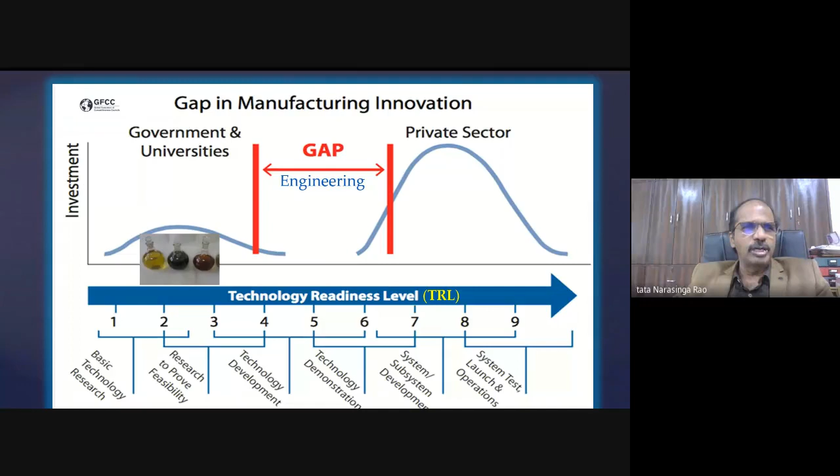Now you are able to see the bottles. It's nano silver, right? Yes, this is one example I'm giving — many people know who attended my previous talks. This is nano silver suspension for antibacterial application on textiles. We make it at laboratory with some students. We demonstrate nice colors because of the particle size — within less than 100 nanometers, whether it's 10, 20, or 30, the color changes because of surface plasmon resonance absorption.

This has tremendous antibacterial potential. So when you apply it on fabric, the company asks, can you make this in large quantities? Then the engineering part comes. You can see the next one, where we had to design a reactor in collaboration with a company, and we made the reactor, demonstrating that these suspensions shown in small bottles can be upscaled up to 15 liters per batch.

The company that received this technology — the CEO is standing in front of the reactor watching how it is made. Then in their company in Bangalore, they set up similar reactors, a plant is made, and now they can make hundreds of liters per day. Eventually they supply this to garment manufacturers like Color Plus, Wrangler, Jeans and others, who apply this. So from laboratory bottle level to product level, you can buy these shirts. It all goes through this chain because this gap is crossed by us.

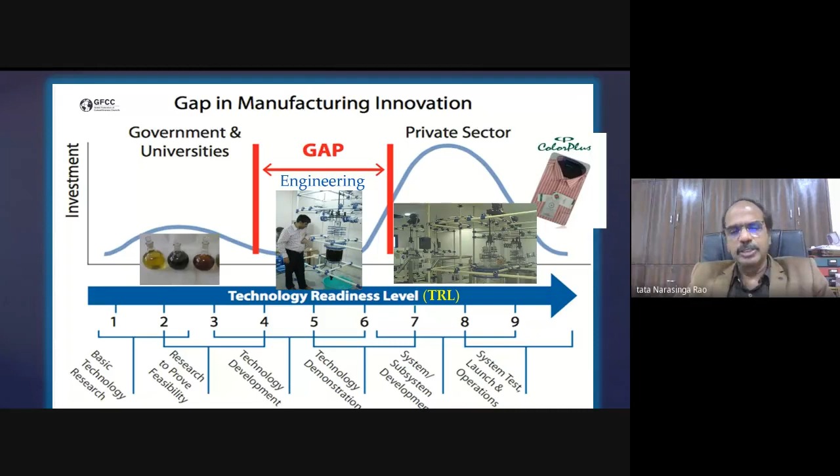So nanoparticles have relevance in textile and a lot of applications — metallurgical, mechanical. Many properties change: color changes, magnetic properties change, boiling point, melting point change, optical properties, electronic properties, and metallurgical engineering properties like tensile strength increase when the grain size comes down — there is the Hall-Petch relation. So a lot of things change, and every sector or branch, students can put their hands in this and do nanotechnology.

But earlier it was a hype; now there are technologies which are saturated, which are now frozen — these are the technologies that nanoparticles can achieve. So now the scale, what you can see here again...

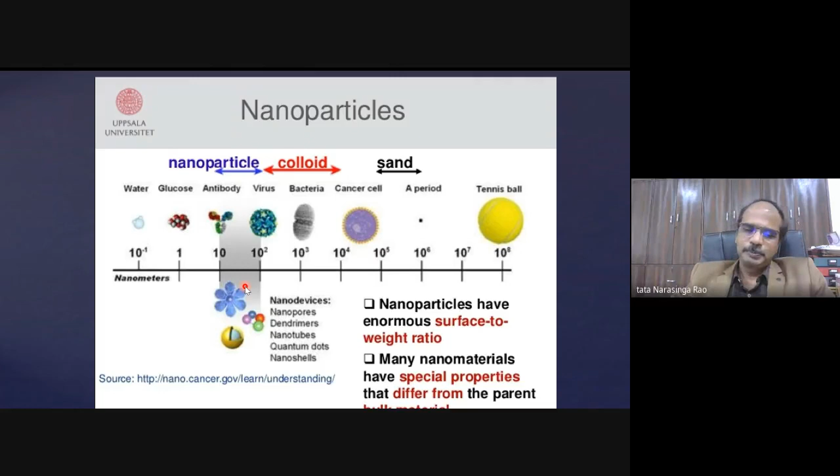And when the virus comes in touch with your body cells, like starting with the throat or nose, it just goes and sticks to the human cell, which also contains proteins and nucleic acid. And if they both match each other, which usually happens, they start entering into our human cells and start replicating their own cells. So most of our cells will get converted. So that is where the danger comes.

But if you have strong immunity and enough antibodies, they don't let this happen, so they get slowed down and finally your immunity dominates and that will go. So nanotechnology has a huge potential to transform people's lives, whether it's bad or better, but we should always feel better because although the pandemic has disturbed a lot of lives across the globe, there are still a lot of good things if you're a positive thinker.

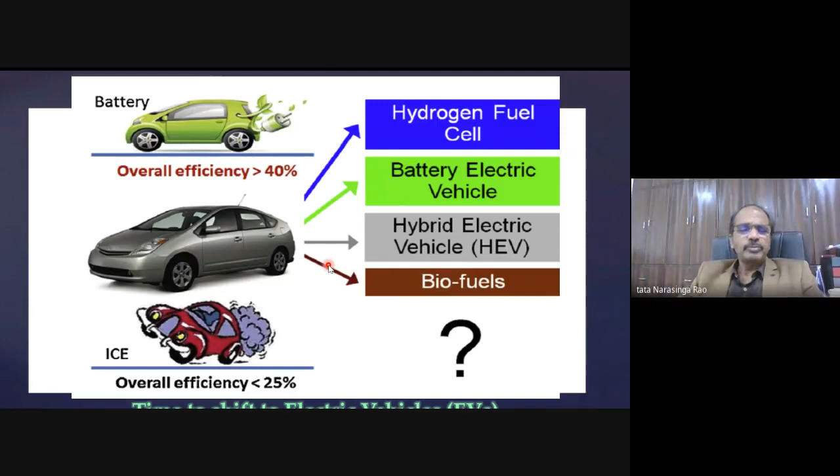Okay, so sorry again. Then if you see in India, auto industry, there are already so many kinds of cars available. You see the Hyundai Kona Electric. This is there in India, we see it on the roads. Tata Tiago, and Mahindra Electric KUV is now launching, and Maruti Suzuki Wagon-R with EV. So all these are already available in the market, but people hesitate because of two things. One is charging stations are not well established.

There is another thing companies are trying to address here, and that is the battery cost. Because we import the batteries, the cost of the car is slightly higher than the equivalent diesel. That's why people still hesitate, because you have to pay money directly rather than waiting for the money to come back after 3-4 years in the form of cost reduction in fuel or electricity.

And you can see a lot of two-wheelers, three-wheelers, a lot of auto rickshaws. Electric rickshaws are plentiful. You can see more if you go north. If I go to Benares, I see many of the autos are electric vehicles, but mostly on lead acid battery. And even the buses, Ashok Leyland is now launching buses with lithium-ion batteries. And of course, BYD, one company in China, supplies a lot of buses.

And if you see in Hyderabad itself, from Mahatma Gandhi bus stop to the airport, the buses are all electric buses from BYD, again a Chinese company. So China has a lot of influence because they work hard and they mass produce things. And when you mass produce, the cost will go down because the supply is more and you're controlling demand. So all this happens.

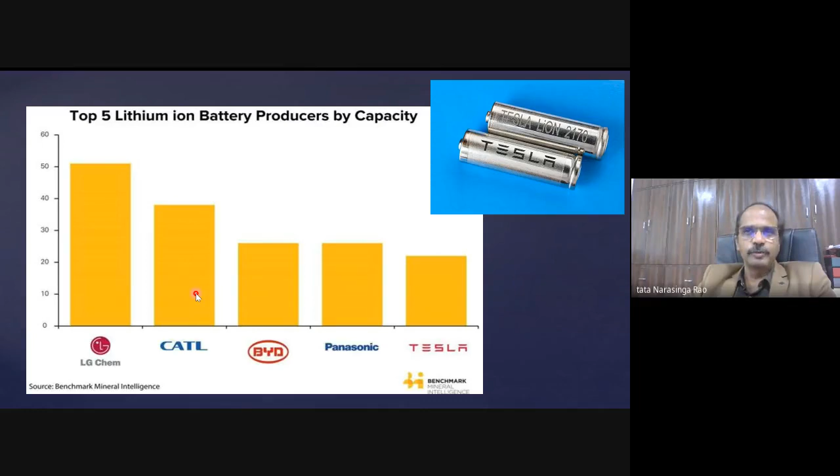Still we spend a lot of money on imports, and if you can indigenize the technology of battery, which ARCI is trying to do, and of course we are partly successful, then I'll show some of our slides. So a battery usually contains graphite as anode, and as cathode, lithium cobalt oxide if it's your cell phone, or if it's an electric car, there are other batteries like lithium iron phosphate and lithium nickel manganese oxide. Those who work in this area are very familiar with all this nomenclature.

So lithium is expensive because lithium is not there everywhere. Even in India, lithium is not there. But China has got plenty, and a lot of South America, Bolivia, Argentina, and Chile, have got a lot of lithium sources. And these advanced countries like China, Japan, and Korea go and lease the land or buy the lands of these mines in these South American countries, because South American countries are not so advanced. They are underdeveloped or developing.

So these people go and mine the raw material, metallurgically process it, and make it in the form of raw sources, lithium carbonate or lithium hydroxide. And these materials are used as precursor materials to make these batteries. If I want to make lithium cobalt oxide, I need to start with lithium carbonate and cobalt carbonate, for example. When you mix them together and burn it, it becomes LiCoO2, and the carbonate will become carbon dioxide, and the carbon dioxide will go out.

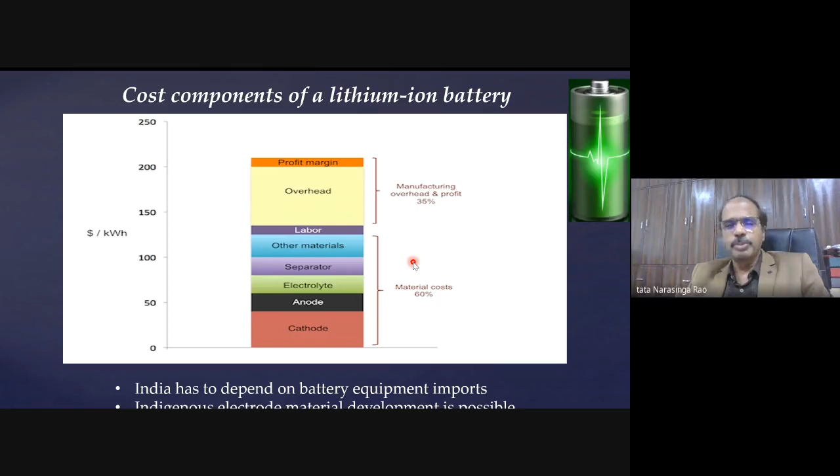And 60% of the cost of batteries is materials. So if you can focus on material development, your battery cost will finally come down, because other things are not so expensive. So at least you can reduce the cost by 30 to 40%. That itself makes a big difference.

So in India, battery plants are not there at the moment, and that's what the government is looking at, because there are companies like Mahindra and Tata that make electric cars, but they import the batteries. Unless you have battery plants in India, you cannot. For example, Hyderabad Batteries Limited usually makes nickel cadmium, lead acid, and high power batteries also.

But now we are in touch with them. We have some small agreements also, non-disclosure. And Hyderabad Batteries Limited itself is coming up with a 40 megawatt hour plant on the Bangalore highway for lithium-ion batteries. They're focusing on probably trucks or buses or whatever it is.

But then we have a huge mega plant coming in Gujarat, with Suzuki contributing 50%, Toshiba 40%, and Toyota Denso 10%. Together they're making batteries. The plant is already getting ready for operation; because of the pandemic it's slightly slowed down. But once they start making them within the country, people get employment, the cost of the batteries comes down, and the cost of the cars will come down.

And we need more battery plants in this country to feed the electric vehicles. If you imagine all the vehicles you see on the roads in Hyderabad or mega cities being replaced with electric vehicles, the numbers are so huge. So you need to have more plants. And indigenous technology for making materials and batteries within the country is very much the need of the hour to go on par with other countries, because we are not so behind in these technologies.

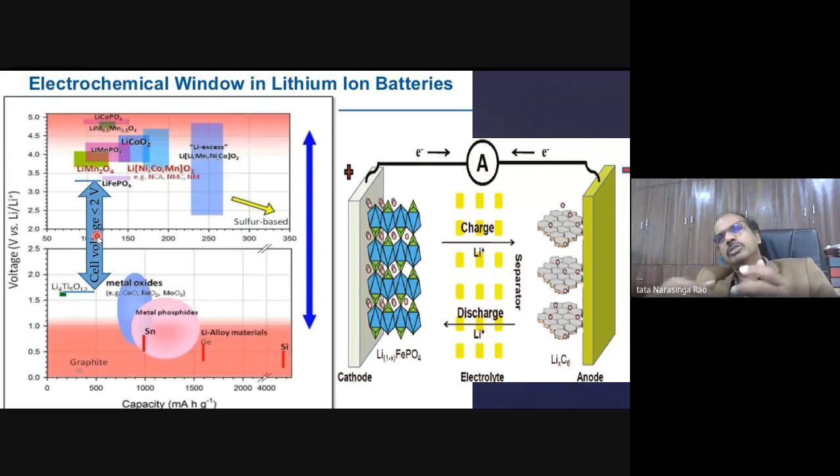Now, a lot of public transport vehicles would like to use lithium titanate as well because they want fast charging in the bus station. So all your cars, taxis or buses which are within the city want to get charged very fast. They don't want long range, so they don't mind using the LTO and LFP combination with 2 volts. But they are very happy that the car gets charged, there is no problem, and it goes to a large number of charge-discharge cycles.

So we want to make in India, where the public transport system is so used, so that's why even Toshiba and Suzuki are all looking for LTO batteries. But to make those batteries, the starting materials, lithium iron phosphate and lithium titanate, are the two key materials India needs. Of course, lithium nickel cobalt manganese oxide has slightly higher voltage. Some high-end cars like Tesla use lithium nickel manganese cobalt oxide because it's a higher voltage.

But the problem here is cost, because cobalt is involved, and there is an issue of stability. But you can manage it by putting more money. So a Tesla car is so expensive. But in India, there are only a few high-end cars you will see on the roads; the majority of the cars are not.

So you can choose the chemistry, but in India, the LiFePO4 graphite combination for long-range vehicles, or LiFePO4 LTO for public transport or short-range vehicles. So graphite is not an issue, but lithium iron phosphate and lithium titanate, these two materials, one has to make. I hope now it's clear the talk will be on these materials. Of course, NMC, like Tesla's, we're also doing, or the Chennai group is doing.

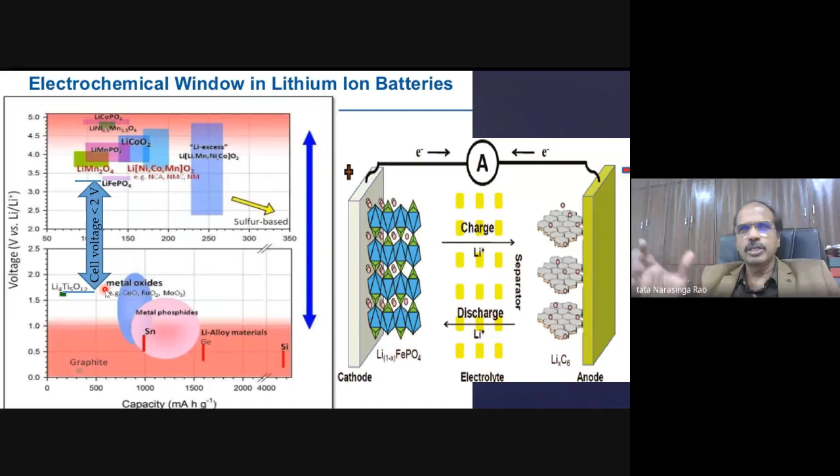By the way, we make these materials in Hyderabad at ARCI, but ARCI also has a research center at Chennai, where we have a pilot plant to make batteries in the form of cylindrical cells, and then demonstrate making small modules and electric scooters. So we focus on the materials, and they focus on making them into cells. Together we come up with this technology.

So this is one, and now you can see here LFP LTO. LTO means lithium titanate, as I showed already, and LFP means lithium iron phosphate. You can have this combination of battery to get very good performance. What I'm showing here is a capacity of 170 milliampere-hours per gram, both electrodes, 150 to 170. And they're very flat. That means until you take 90% of your energy out for your scooter, your voltage remains constant. So your electric vehicle keeps moving.

But in some batteries, the voltage falls with a slight slope, so after running for some time, if you're targeting 300 kilometers or 250 kilometers, you have to be very careful. It's like the reserve in the case of fuel, but here you have to start charging. So these are the things we focus on.

So we work on these two materials, and lithium iron phosphate is excellent and low cost because there is no cobalt. It's only iron, and lithium you have to put money on anyway. This was invented by John Goodenough, who got the Nobel Prize with two of his contemporaries, one Japanese who worked on technology, and another on fundamentals.

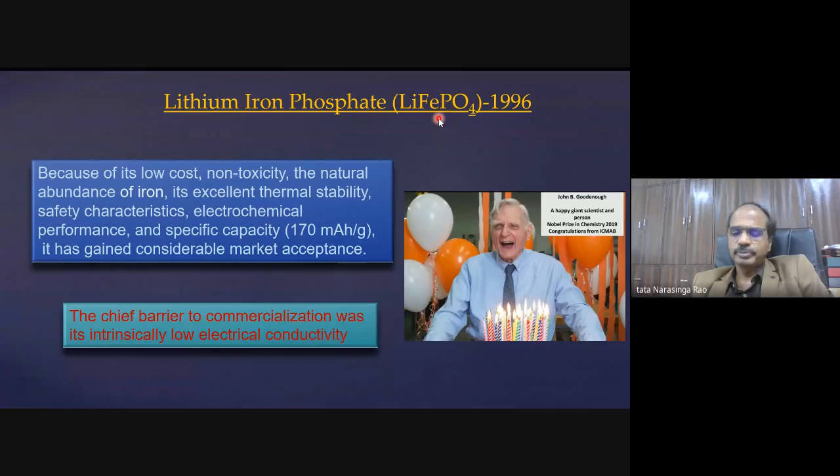So then what happened when nanotechnology came? In nanotechnology, when you have a big particle of lithium iron phosphate, because it's an insulator, the diffusion length of the lithium when it enters the particle requires it to swim through this diffusion length. But if you have a nanoparticle, for the same volume, the diffusion length is small, so in each particle, the lithium goes in and comes out very fast.

So charging and discharging is very fast, and all your material gets lithiated in a short time, whereas with bigger particles it takes a long time. So if your battery has to be charged in a given time, with 1 to 2 micron lithium iron phosphate particles you only get 50 milliampere hours. With nanoparticles, you get 150, 3 times more, because it quickly gets lithiated, or when you discharge, it gets delithiated. So the size effect is more important.

But you can ask, how is the current taken out? When the electron comes to the surface very quickly as the lithium moves, these particles are coated with carbon, which is electrically conducting, connected to the current collector. So you coat these materials as a thin film with carbon incorporated. Whenever there is lithiation and delithiation, the electrons go to the current collector, and that current comes through your cell and through the external circuit, and your electric motor runs.

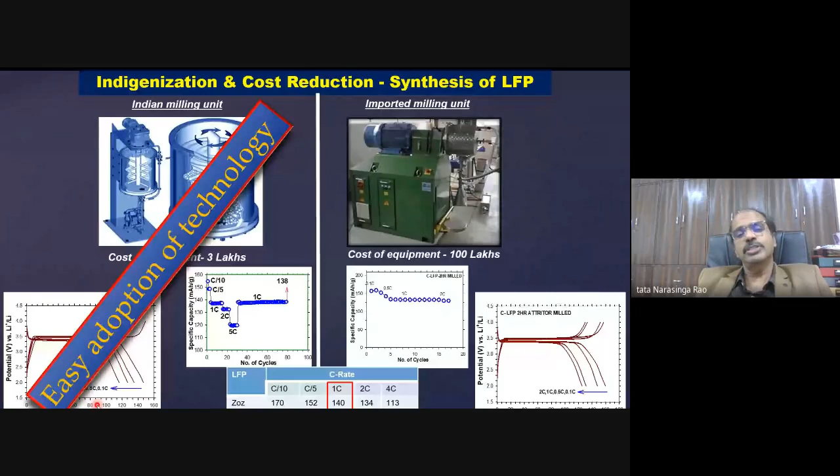That's what we do. And the other material, lithium titanate, which is an anode for fast charging - that's the same thing, because again it's not such a good conductor, so we have to make it in nano size. So what I am showing is nano size makes a difference.

And the Nobel Prize that Goodenough got for LiFePO4 is really seen in electric vehicles, because they are converted into nano size and carbon coated. So size has a big role to do with it, and nanomaterials have a big contribution in energy storage in electric vehicle technology.

All research usually starts at the laboratory level, and lithium titanate has taken the leap only very recently. One of my young research students, a girl who is now in the US, joined for her PhD, and I gave her a topic to start making lithium titanate. I didn't know lithium titanate would become so famous now, but we were only interested in the fundamental research - how the size affects the kinetics, the charging rates, and the capacity improvement.

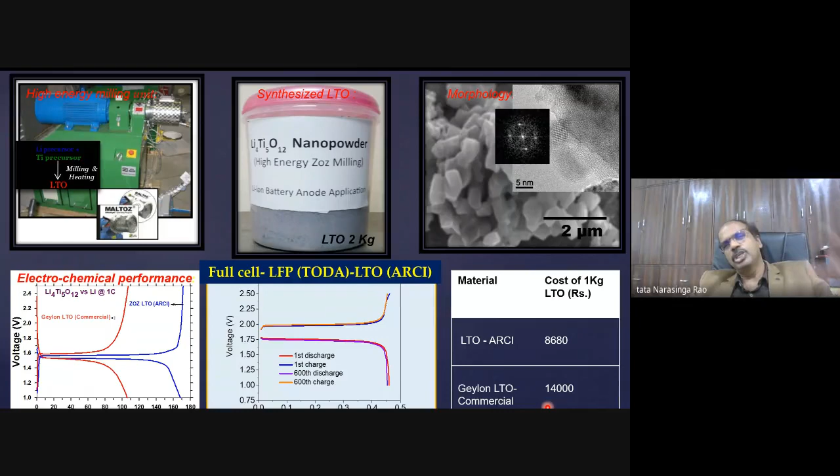So there are companies interested and collaborating, testing milling and such on their side to make tens of kgs for validation at the commercial level. And on another side, these materials are given to companies to test, so that a total ecosystem is created right from material making, technology, and commercial upscaling, to supplying the battery industries - making the institute rich, the company rich, and the nation altogether.

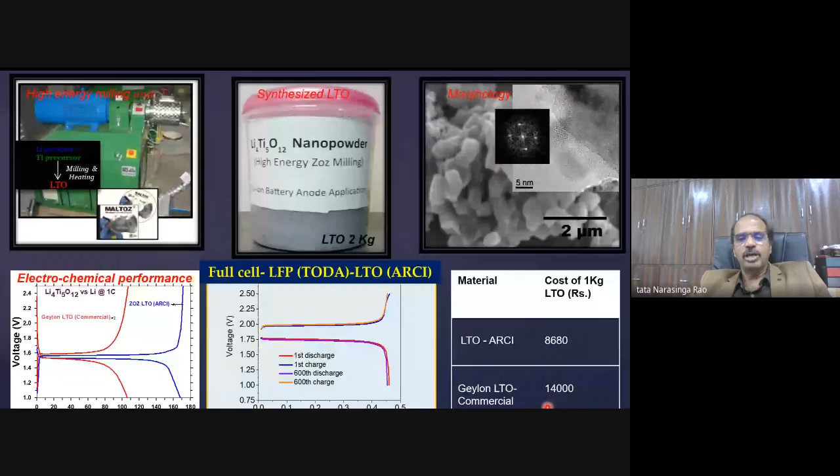We demonstrate - our Chennai people demonstrate the Chennai plant. They make these materials, use them to make plants, batteries, and run some motors, as you can see here. And people look at next generation batteries - the next generation battery is lithium sulfur. Lithium sulfur battery, what we do is - I think I have half an hour time, right?

I think I can finish it, no problem.

Whereas sulfur, lithium sulfide, lithiated sulfur, is 1600. My God, so it is so many times higher, but its voltage is less, only 2 volts versus lithium. If you take lithium cobalt, it's 4 volts. So I'm compromising on voltage by 2, but increasing the capacity multiple times. The total energy density is capacity into voltage, and if you multiply, sulfur gives very high energy density that can be stored.

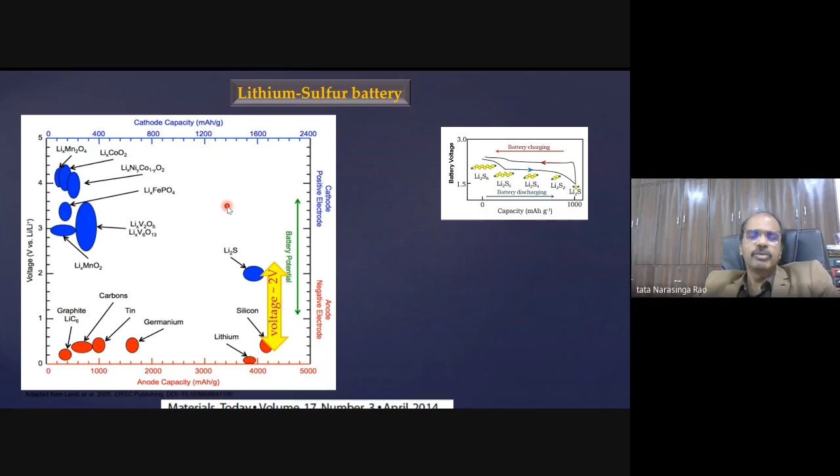But your energy density means the driving range. If you want to go to Pune or Tirupati, then you use lithium sulfur batteries, which are smaller in size because of high energy density than conventional lithium batteries. So the whole world is looking for lithium sulfur batteries, and ARCI has also initiated work at TRL3 level, and we have shown that.

But there is a challenge in lithium sulfur batteries. Why? Lithium sulfur batteries are known for decades, but not implemented because of a lithiation problem. During discharge, the sulfur takes lithium and forms polysulfides, Li2S8, Li2S6, all these are soluble. So from the sulfur these dissolve in the electrolyte and go to the other electrode during discharge, and you lose a lot of sulfur during the shuttling, and then the battery slowly dies.

So your dream of getting high energy density will last only a few cycles, maybe 20, 30, 100 cycles, whereas actual batteries require 1,000 to 1,500, even 2,000 cycles if you want to really use them for electric cars. So can I increase its cycle life by containing these polysulfides without letting them go into the electrolyte?

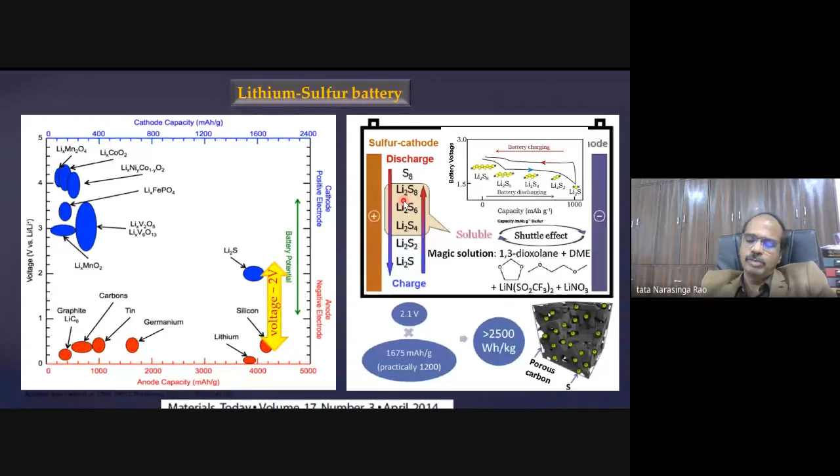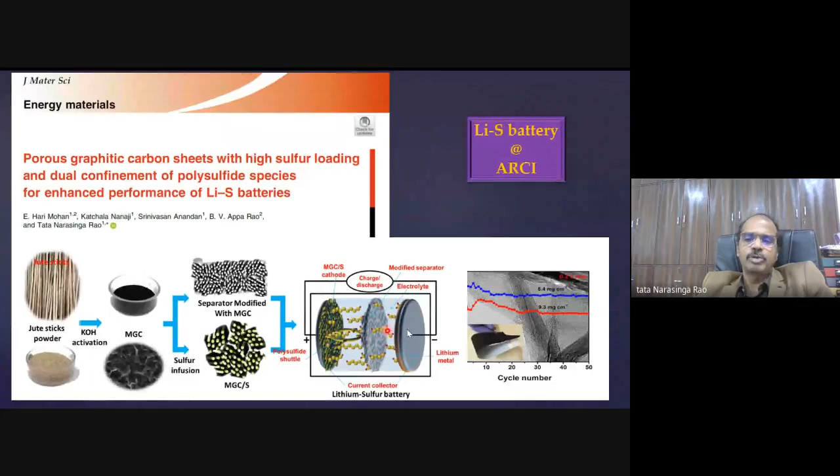You can see my team at ARCI, my student Hari Mohan, now in Germany, and we recently published this paper in Energy Materials. We make carbon from jute stick, nanoporous graphene-like carbon, and incorporate sulfur into it, then use this as electrode. We also have a separator coated with this kind of carbon, so that any polysulfide gets trapped in the electrode, and a little coming out gets trapped on the carbon on the separator, so it doesn't escape outside. That is what we have demonstrated here.

You can see at 50 cycles, 800, whereas usually 200 or 170 is for conventional battery material, and I'm talking about 800 with very good stability. We tested up to 50 cycles, but the trend seems to go beyond that. The energy density practically can go up to 2 times, 3 times, because you put a lot of carbon as support, but that itself is a good achievement.

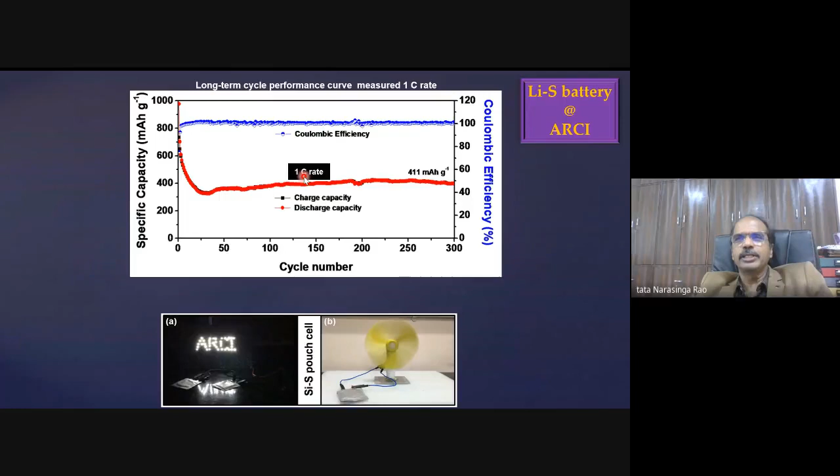Recently we also showed up to 300 cycles at high C rates, meaning higher charge discharge capacity. That is a real demonstration for practical application in electric cars, because when you drive very fast, it is around 1 C rate, and I get 400, which is double that of conventional lithium battery. That means instead of 200, I can travel 400 kilometers, which is a very big driving range.

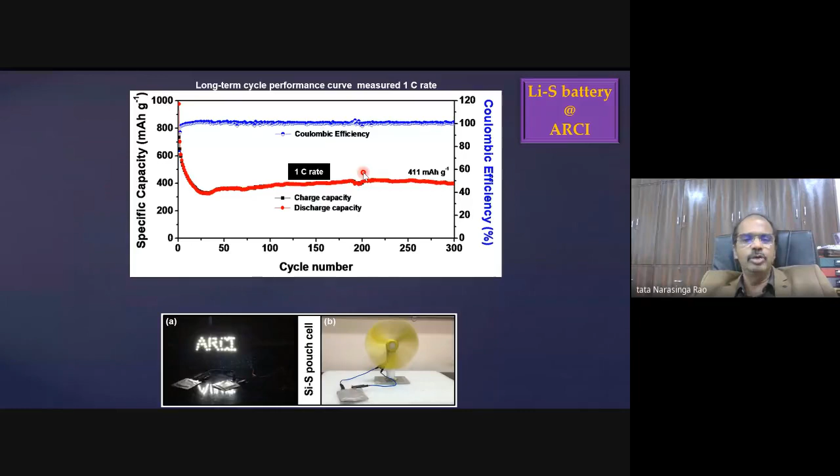So these are the things we are working on now at lower TRL levels to improve the lithium-sulfur battery, and then maybe next we'll go to the bigger scale.

So I have another 25 minutes, maybe in 15 minutes I'll finish my talk.

A capacitor, if you recall your high school physics, is 2 metal plates with a dielectric in between. When you apply voltage, the charge gets accumulated on the electrodes, and that gives the capacitance.

So the rule is half CV squared: how much voltage you can sustain on a capacitor, maybe 2 or 3 volts or 4 volts, and what is the capacitance in terms of farads. C is the capacitance and V is the voltage, squared, and that is the energy density.

So in supercapacitors, why is it called super? Normal capacitors, what we use in our printed circuit electronic boards, are all in microfarads or maximum millifarads. But in a supercapacitor, I'm talking about hundreds of farads, thousands of farads. So once the farad, the capacitance C, increases, the energy density increases. You cannot use small capacitors in an electric vehicle, although they are storage devices, because the energy density is so small.

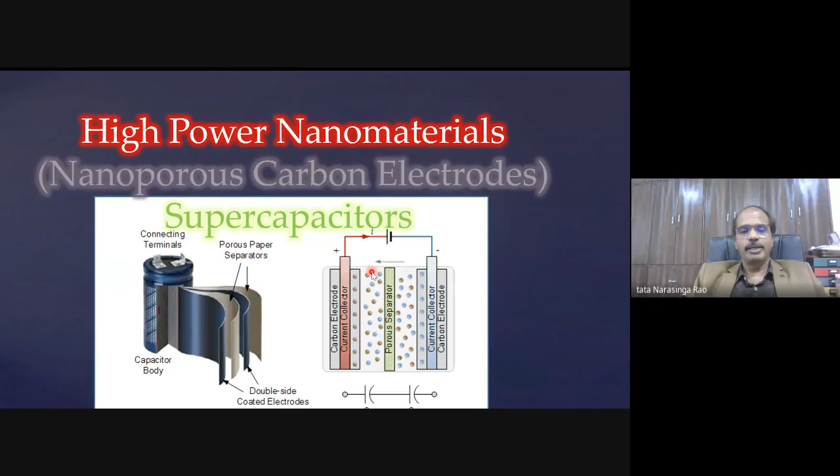But I can use a supercapacitor for a race car. Okay, it will go 200, 300 kilometers per hour. So again, my student shows a supercapacitor is like a 100-meter race, where the guy has to put all his energy and run for these 100 meters from the beginning. Whereas a lithium-ion battery is like a long race where people run slowly, but with lots of stamina, for 10 kilometers or so.

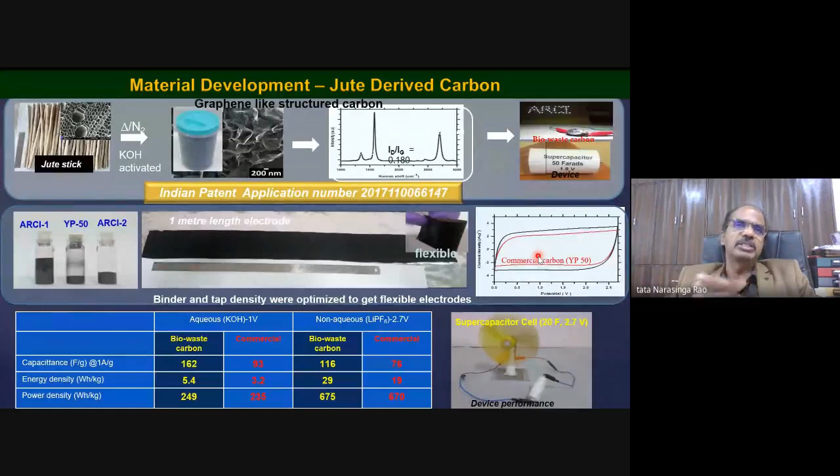So we demonstrate this and showcase that at several levels, whether energy or power, we're on par with the imported ones. And we show our demonstration at small coin cell level, ARCI's lighting with the supercapacitor using this jute-based carbon. We also have other materials like coconut carbon. We're working with a company to make use of this coconut-based carbon, converting it to a huge surface area by CO2 activation.

It's called activation. And most important, we have HPCL, a public sector oil company, HP. Your HP petrol bunks are there. They have oil refineries, and they have a lot of byproduct called petroleum coke, pet coke. Pet coke contains a lot of sulfur, and a lot of small-scale industries like cement and steel use pet coke as a fuel, but a lot of sulfur dioxide comes out as a toxin. In fact, import is banned, but within the country we have 14 million tons of petroleum coke generated every year, and many industries burn it, contributing to a lot of pollution.

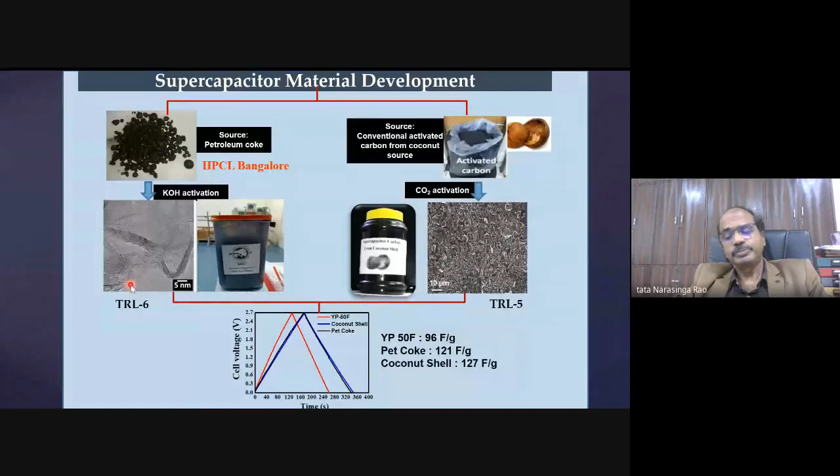But petroleum coke is 90% carbon. With coconut, you only get 10 to 20% of actual activated high-surface carbon, whereas here you can extract up to 70%. So now we are working with HPCL, funded with 1 crore, to make this material into supercapacitor grade, and we established a fabrication line together with HPCL at ARCI, with all this equipment to make supercapacitor cells. You can see jelly rolls made, carbon coated on aluminum foils.

You can see the negative and positive electrodes with the separator running, the white one, then rolled into huge jelly rolls, and finally you flatten both sides, put it in a can, and make a cell. Now I have a Maxwell device made with YP50, the blue one, and ARCI's is the green one. We are on par in size and capabilities. ARCI and commercial are very close, both in charge-discharge and energy density. And that is because of the laser welding technology.

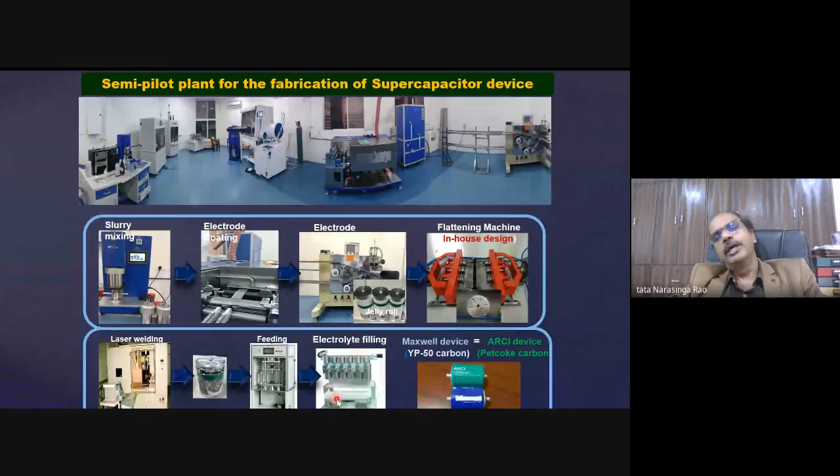Here, the laser welding of this and flattening, this is a very critical engineering aspect. I was showing, jumping to the product side, the engineering gap in my first slide, the TRL slide. So that gap is crossed here in ARCI because of these facilities. Although we made material and scaled it up and then made a jelly roll, even from here to here it is a big challenge.

So we crossed all over, and today probably it is the first device of 1200 farad on par with the 1200 farad imported one, and we are the same as the benchmark one. We're going to upscale, more supercaps will come, and we're going to demonstrate a bicycle with this soon with our own supercapacitor. Earlier we already demonstrated with the imported ones. Now we're going to do our own supercaps, and probably they're also good for this bicycle.

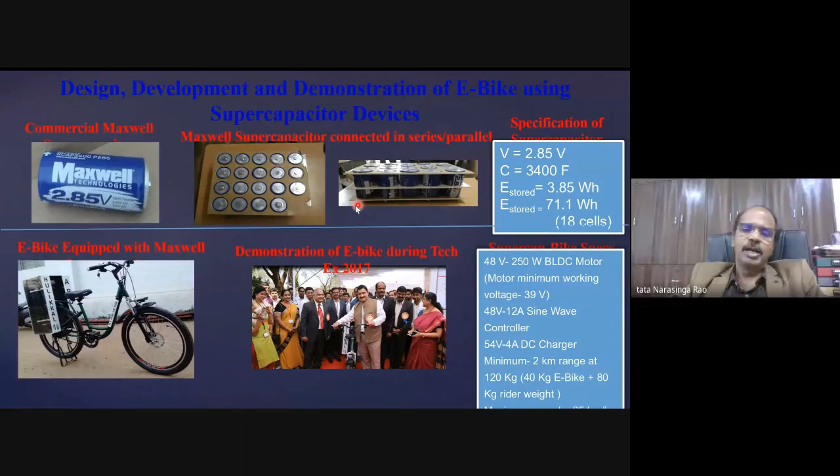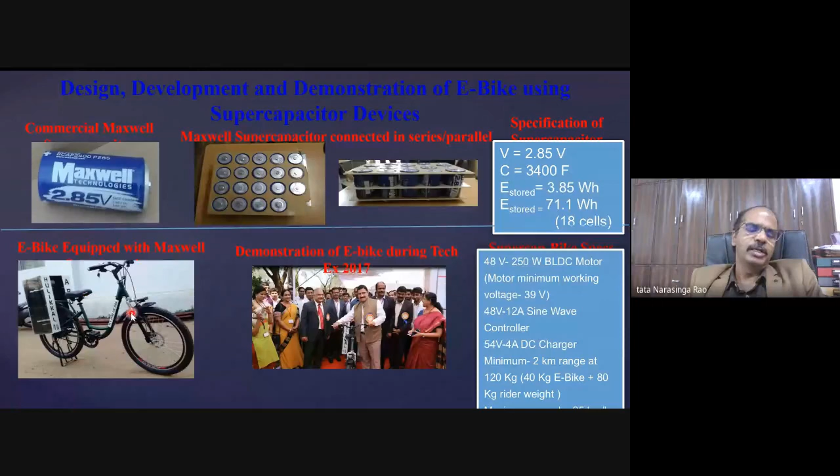Earlier we demonstrated in 2017, packed with Maxwell supercaps, and now that I showed our supercap, we can use this supercap and do the same thing. So it's a parallel work. One, you demonstrate and show the capability that you may have a bicycle without batteries and only supercap. And on the other side, you make the supercap from your own material, like pet coke based. Then you put these supercaps in and demonstrate. That's what in the next few months we're going to do, and go for the higher scale and finally demonstrate for a bigger electric vehicle.

We are also looking at a lead acid battery driven auto rickshaw, which is very common, but the lead acid battery gets abused very fast whenever you have speed breakers or a bridge. Many of the autos cannot climb flyovers. They go only on the service roads, because climbing is difficult, especially with lead acid electric vehicles. But if you have a supercap combined in a hybrid mode, whenever you need very high power, very quick energy to climb for a few minutes,

or a speed breaker came and it stopped, when you want to start again you need to accelerate. But for acceleration you're drawing very high currents, and the battery cannot give high currents. It gets abused, your 3 years battery life will come to 6 months, and your lead acid battery will die. So supercaps can assist in supporting those normal batteries, whether lithium-ion or lead acid, so that they don't get unnecessarily abused whenever there is a high demand of energy, whether it's speed breakers or climbing ramps.

So this is our excellent team of people; these are all actually our scientists and students. This guy is not a driver, he's my senior scientist. This guy recently finished a PhD from IIT. So all these are our members. An excellent team we have. And sometimes for the hard work, we get a small token of appreciation.

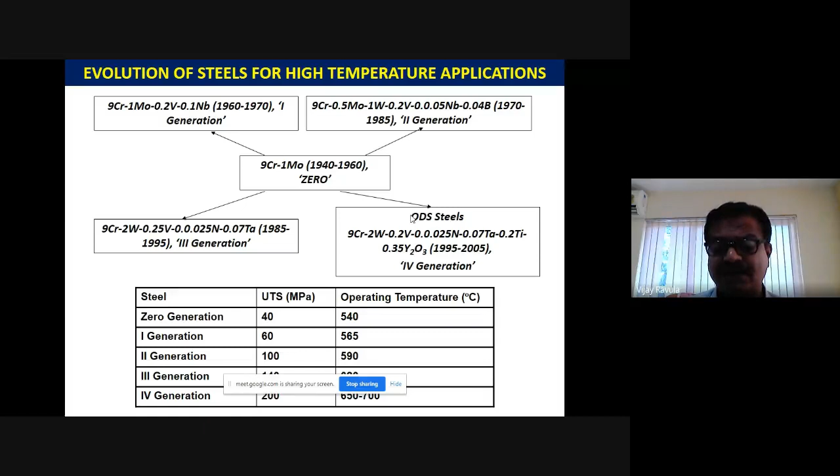If you compare the strength and the operating temperatures from the 0 generation to the 4th generation, the strength levels have gone up almost 5 or 6 times, and the operating temperatures have gone up by around 100-150 degrees centigrade. So that's the overall development going on around the world.

And if you look at the clad tubes of the fast breeder reactor, we have nuclear reactors where uranium oxide is the fuel, but unfortunately uranium oxide is not available in India, and we have to import it. Because of this limitation of the supply of fuel, the nuclear power plants are not running to full capacity, only at 50% or 60%. But in India, we have a lot of thorium available, but that's not used for the conventional nuclear reactors.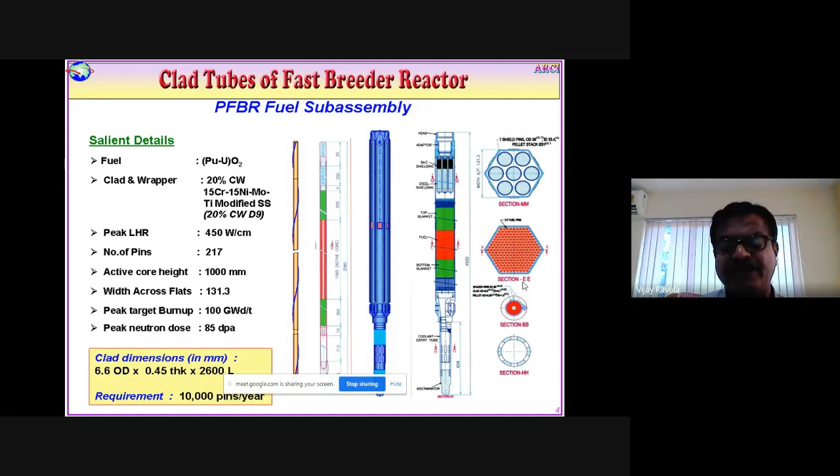But unfortunately, the target burn-up is 100 gigawatt days per ton of the material, and the neutron dose of 85 dpa it has to withstand. The problem is when conventional steels are used, you have void swelling, radiation creep, helium embrittlement, and an increase in ductile to brittle transition temperature.

So that's why the material swells, and then a lot of compressive forces are generated, and the material fails before the fuel life is realized.

So what is the material selection? You should have high swelling resistance and adequate end-of-life creep strength and ductility, because it should not break, because of handling of this radioactive material. At the same time the material should have less active elements, so that this material does not become radioactive, and disposal of this material is also a big problem.

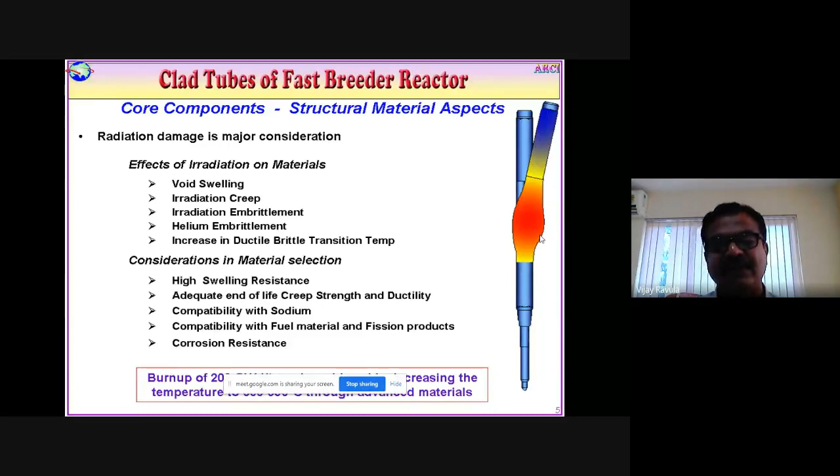And then compatibility, because this is all sodium cooled. Liquid sodium is used to extract the heat generated by the nuclear reaction, and of course corrosion resistance and other things have to be there.

So that's all in the fast breeder reactors. Coming to the fusion reactors, India is a partner in the international development of fusion reactors, where we have blanket plates and diverter plates, which also get radiation exposure and high temperatures, so the materials have to be developed to withstand these things.

So that's why high temperature strength, high swelling resistance, and lower accumulation damage. The material should not become radioactive, but anyhow it will become radioactive, so the activation life should be as minimum as possible. That's why reduced activation ferritic martensitic steels are recommended for this.

Coming to the thermal power plants, presently our plants operate at around 550 degrees centigrade, and the efficiency is only around 41%. But if you operate around 700 to 750 degrees centigrade, you can go to around 46% efficiency, and thereby realize more energy from burning coal.

But the problem is, if you want to operate at higher temperatures, the pressure also goes up. At 540 degrees centigrade it is subcritical; in supercritical, the pressure is 28 MPa, 280 bar, and if you go to 760 degrees centigrade, around 350 bar is the steam pressure developed, which goes into the turbine.

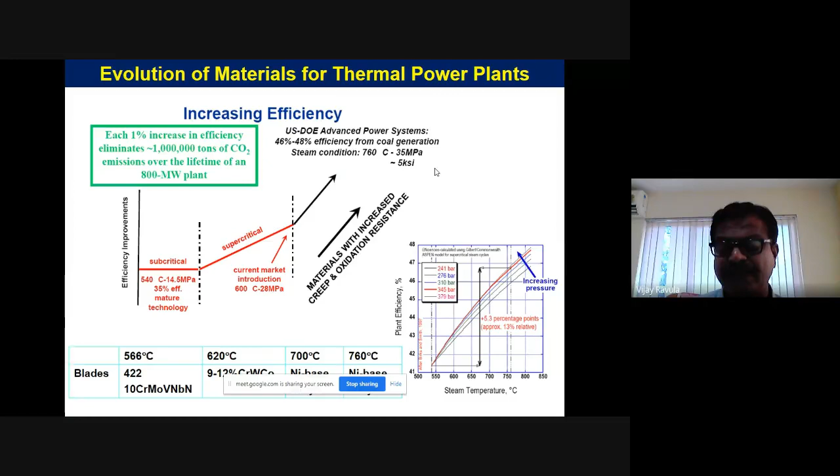So the whole material needs to withstand that kind of stress, and the life should be around 1 lakh hours, both in terms of creep and fatigue life.

Conventionally, iron-chromium steels are used up to 600 degrees centigrade. But beyond 600 degrees centigrade, there is no material available. If you go to 700, you are straight away going into nickel-based alloys. In this graph of relative material cost with steel versus allowable temperature, there is this red gap.

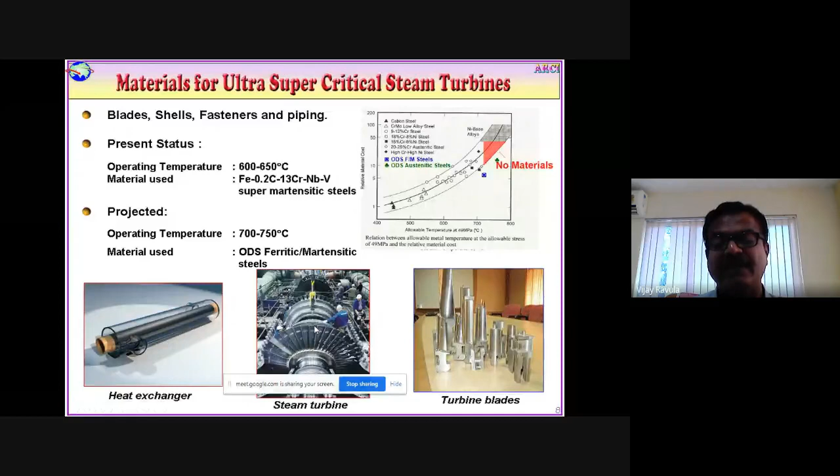So there is no material available, and people have to use nickel-based alloys, where the cost goes up by 50 times the steel cost. When we develop ODS ferritic martensitic or ODS austenitic steels, the cost will be here, and they can be used for turbine blades in thermal power plant applications. So in this regard, we have been developing those materials.

And why oxide dispersion? Look at the temperature and the neutron dose. Conventional austenitic steels have high active elements, and they also get void swelling. Ferritic martensitic steels can take higher dosage, but the operating temperature is less. But when we put oxide dispersion, the oxides act as sinks, and they don't allow the knocking of the elements in the material. So it can take higher neutron dose as well as higher temperatures.

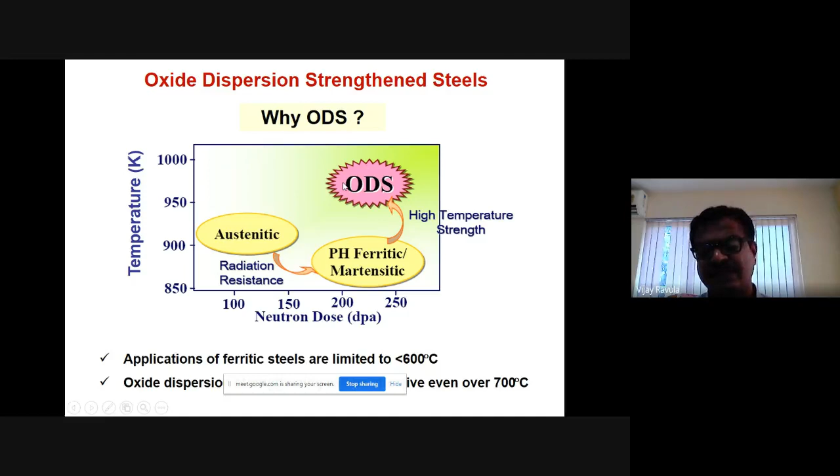Coming to some of the literature review on how oxide dispersion happens. Yttria is very much used in this dispersion. To refine the yttria oxide particles, people tried addition of different elements, and they found that titanium refines the oxide particles to a fine stage, forming oxides like Y2Ti2O7 and Y2TiO5 particles.

The finer one is Y2Ti2O7. People always look for formation of Y2Ti2O7 particles, and for that you need to maintain an atomic ratio, or the weight ratio.

So what is the function of the oxide particles? When you put a stress, a lot of dislocations are generated, and these dislocations will pile up or move, and thereby the material will break or fracture if the density is very high.

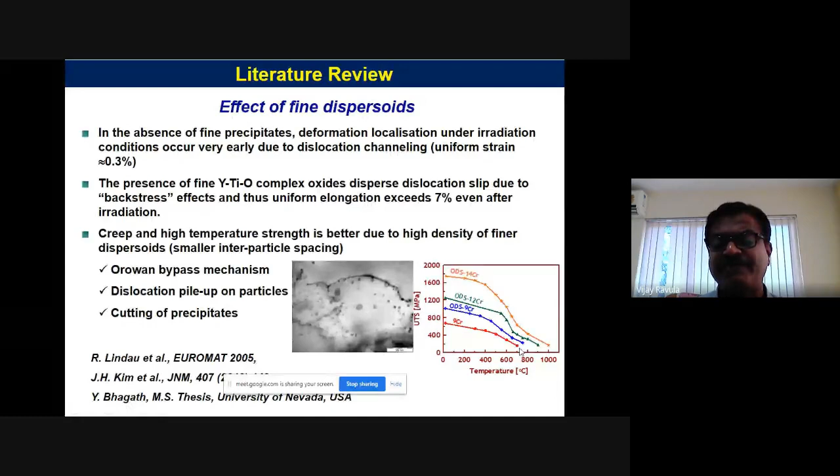Looking at the right side graph, this is a typical 9 chrome steel strength level, and when you put oxides, the strength levels go up. Similarly for 12 chrome and 14 chrome, the strength levels go up from room temperature to even higher temperatures. That's the effect of fine dispersoids - that's the science behind it.

Even the creep and fatigue behavior goes up. If you see the stress levels for different time levels, comparing 9 chrome and ODS 9 chrome, there's a big jump. Similarly for fatigue life, from 9 chrome to ODS, the stress goes up significantly, and it can take more number of cycles too.

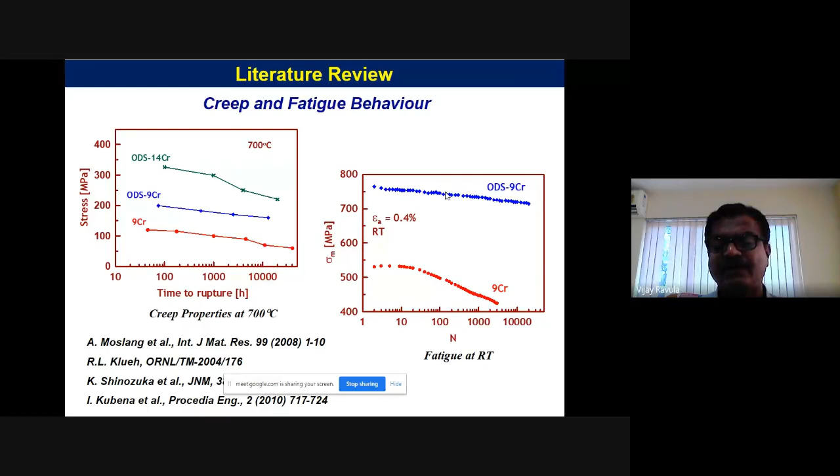That's an advantage, so we have embarked on a major program developing these materials. This is a typical process. We have an inert gas atomizer where we can produce our own alloy powders, and we buy nano yttria oxide which is available in the market. So how do we disperse it? The dispersion process is by high energy ball milling.

This is because the powder has gone through a lot of milling collisions in a mechanical milling process, so it accumulates a lot of strain. Once there's strain, when you press it at room temperature, there will be a spring back because of the strain. So the green density you get in this material will be very low, and when you sinter it, you won't get a good density - only around 80%, with the remaining being porosity.

That's why these materials need to be hot worked. So how do we hot work it? We do the hot extrusion process or HIPing process. When hot working it, you cannot expose this material to air at that temperature because it gets oxidized.

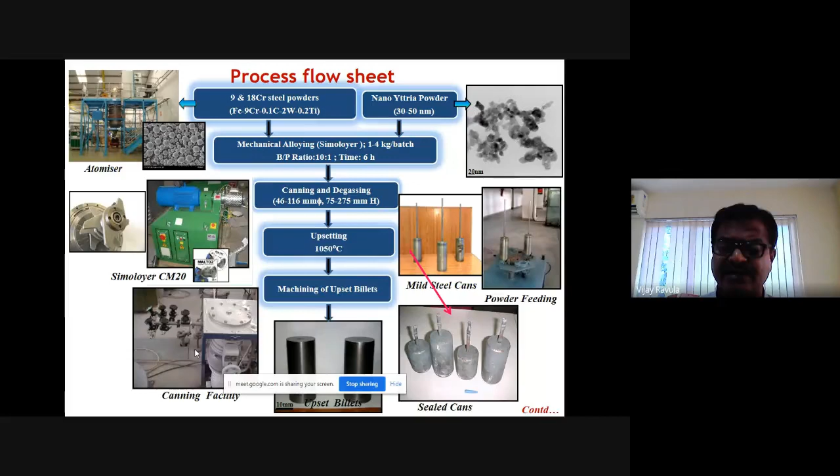That's why the powders are filled in cans. These cans are filled using a pneumatic vibrator so that you get a good tap density. Once filled, the cans are connected to a vacuum degassing facility, heated at around 400-450 degrees centigrade, where the adsorbed gases on the surface of the powder particles come up, and then they are sealed. These cans are sealed under vacuum.

These cans are made into billets by hot extrusion, by upset forging in a closed die, at a certain temperature, thereby getting around 98% density. These billets are hot extruded with different extrusion ratios to get sizes ranging from 16mm to 40mm, or whatever size is needed. These extruded rods are then used for heat treatment, characterization, or conversion into different components.

That's what we do. This is what extruded rods look like - we get 40mm rod. When you do pilgering, you get a clad tube for the fast breeder reactor. When you do hot rolling, you get plates for the fusion reactor. And when you do closed die forging, you get a blade for steam turbines. This is the turbine blade we made for the 500 megawatt first stage turbine.

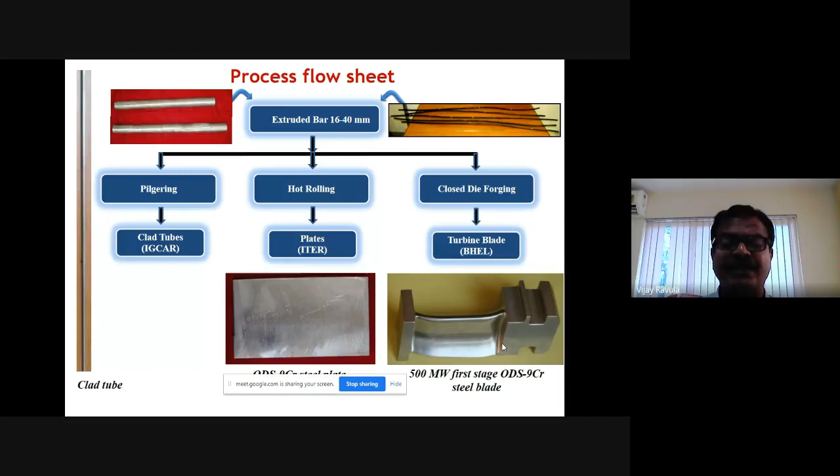We also have a state-of-the-art facility for the manufacture of powders. This is an inert gas atomizer. It has 3 compartments. The top portion is a melting furnace, an induction melting furnace, where you put your material in a crucible and then melt it.

At the bottom is an atomization die, where you have a metal flowing nozzle as well as a high pressure gas supply. This gas hits the molten metal stream coming out through the nozzle, and thereby the material is made into spherical powders. They form immediately because you have a high gas velocity and buoyancy forces acting on the particles, which makes them spherical.

Unlike a water atomizer, where cooling rates are very fast, water atomization gives you irregular powders, whereas gas atomization gives you very good spherical powders. These spherical powders are very good because they give a lot of flowability to the material.

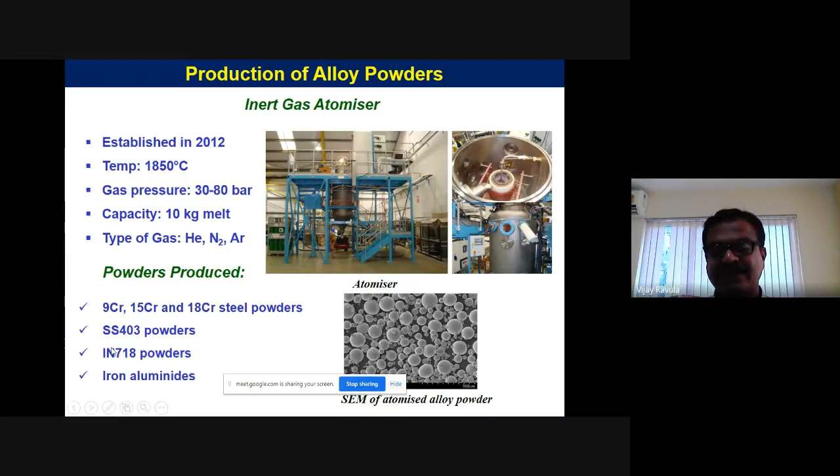Our capacities: temperature is 1850 degrees centigrade, gas pressure can vary from 30 to 80 bar, and 10 kg is the melt capacity. We can use helium, nitrogen and argon gases for making these powders, and oxygen content is very critical in all these high-end applications. We made 9 chrome steel, all chromium steels, SS403 stainless steel powders, IN718, and iron aluminides.

We also subsequently use mechanical milling, using a horizontal high energy ball mill. The typical thing about mechanical milling is that it's a repeated fracture and welding process taking place because of ball-to-ball collisions, and collisions between the ball and the vessel of the mill.

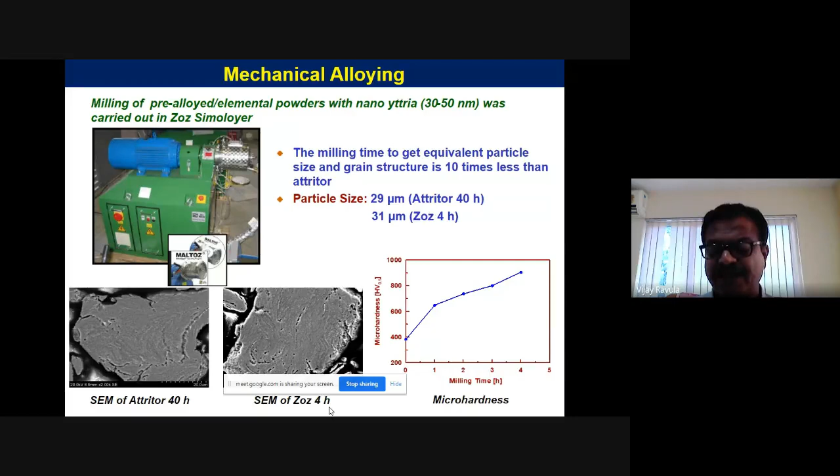Everything depends upon the relative velocity of the balls being generated. If you compare the same material milled in a conventional attritor, it takes 40 hours to give you a particular particle size and cell size, but with this mill it takes only 4 hours. So the time required for milling with this mill is very, very low.

The reason is it generates a very high kinetic velocity, greater than 14 meters per second, and the energy input is half mv squared. So you can imagine the kinetic energy generated is very huge.

This gives you short process time and low contamination, because milling is a very dirty process. If you keep milling, there is a lot of wear and tear on the balls and vials, and the longer the duration of milling, the higher the chances of contamination of the ball material or vial material coming into your powder.

Typical high energy ball mills like planetary mills give you only 5 meters per second, attritors give you 4, and conventional ball mills give you less than 5 meters per second, whereas this horizontal ball mill gives you 14 meters per second.

The beauty is that in our mill there are no dead zones. It is designed such that at any point of time the balls and powders are always in motion, unlike any other ball mill where there is always a dead zone, with all the ball mass on one side of it. These are all the advantages of this mill, which we made use of to produce these powders.

These are all the starting powders. We can see the 9 chrome steel powder and the 18 chrome steel powders, with typical chemical composition given here, and the size fraction and sieve analysis given here, all of which is produced. These are the materials we produced in house and then used.

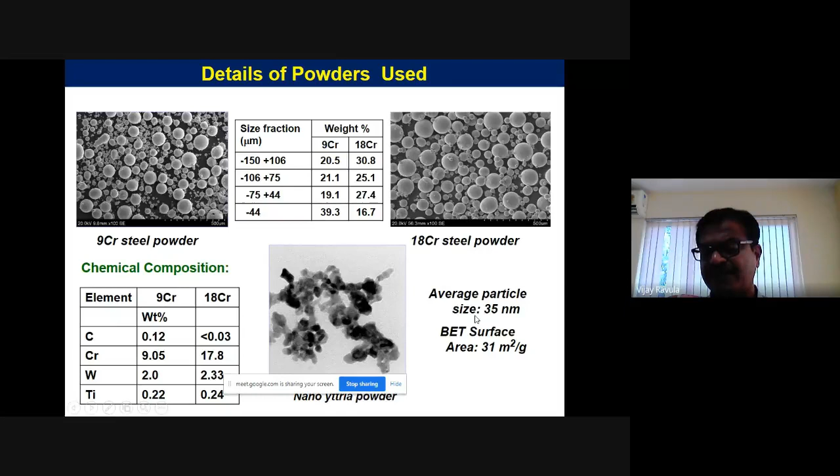This is nanoyttria which we purchased, with a particle size of around 35 nanometers and a surface area of around 31 square meters per gram.

When we mill it, ideally the reaction forms Y2Ti2O7 particles. Then this yttria should dissolve in the matrix and should not be there as a separate phase. It should completely dissociate and then dissolve.

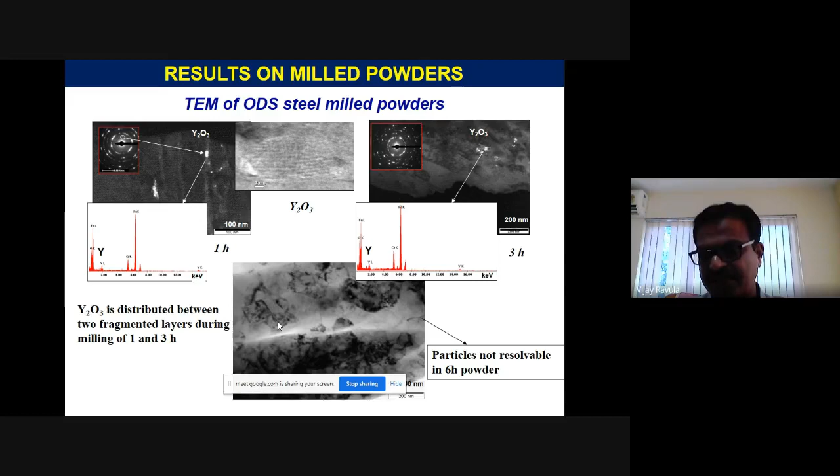That is the optimum milling time. At 1 hour mill time, we can clearly see white spots, typically Y2O3, still remaining, and even at 3 hours they still remain. At 6 hours milling, we don't find any of those yttria particles, meaning they remained dissolved in the material or as an atomic cluster, having lost their chemical structure as a compound. So they remain as atoms in the material. That's why 6 hours is the optimized milling time for dispersion of the yttria particles.

We then went ahead with the consolidation process. In the consolidated extruded rod, looking at the typical microstructure, this is an EBSD grain boundary map, where we get a grain size distribution of around 630 nanometers - very fine grains. The dispersoids are uniformly distributed, with an average size around 5 nanometers, and number density around 10 power 23 per meter cube, equivalent to an Avogadro number. That's very huge, while the volume fraction is very small.

If you increase the volume fraction, the material becomes brittle, like a ceramic, and the ductility comes down. That's why we need an optimum content of these oxide particles - finer the particles, more the number, and you can achieve it with a lower volume fraction. That's what we were able to achieve.

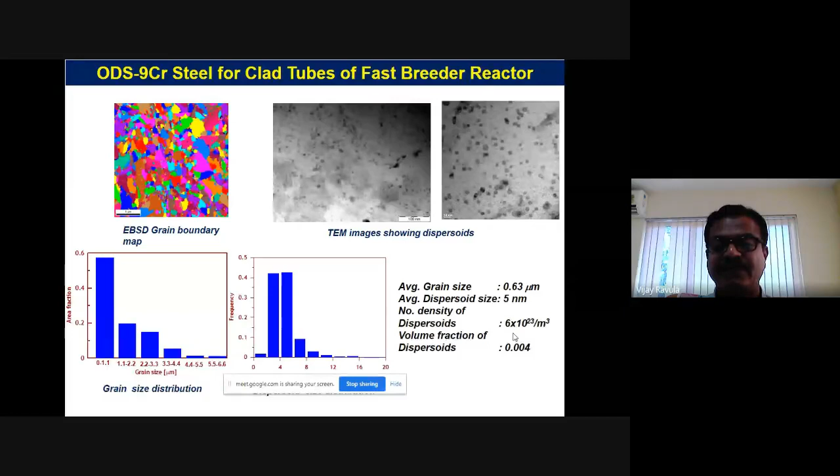Looking at the 18 chrome material, this is an EBSD grain boundary map showing the grain size distribution. The grain size is around 370 nanometers, and the dispersoid oxide size is around 4 nanometers.

Looking at the typical particle structure, we can see this is Y2Ti2O7, shown in this selected area diffraction image. We can see that the KS relationship is maintained, with an orientation between the matrix and particles - that's why they're not simply dispersed. Generally dispersoids have no orientation, but here they do, meaning this is actually a precipitation of an oxide, not an intermetallic or carbide or nitride, but an oxide precipitated in this material. That's why they are all finer.

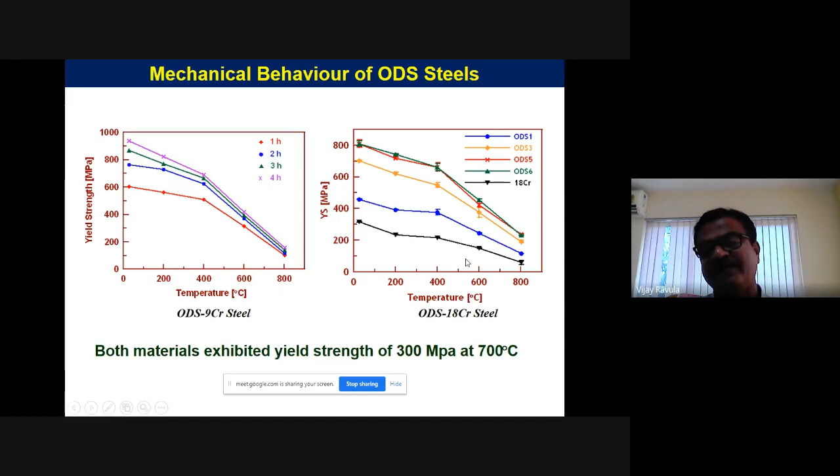Coming to the properties, we can see the yield strength at different temperatures. For our 4 hour, 9 chrome sample, around 300... of course any material loses strength at higher temperatures. Around 700 degrees, which is the operating temperature for the fast breeder reactor or steam turbine, the strength is around 300 MPa. The material requirement is only 100 MPa, but both 9 chrome and 18 chrome gave around 300 MPa strength at 700 degrees centigrade.

We have also done modeling, because the strengthening is a summation of individual components like matrix strength, Hall-Petch strength, and dispersion strength. We found that at room temperature they don't follow linear summation, but instead follow the root sum square method, and the experimental values and calculated model values match well.

These results are published in papers in Material Science and Engineering, Metallurgical Transactions A, and ACTA Materialia. We could predict what grain size and dispersoid size would be needed to achieve a certain strength.

The beauty is that two strengthening mechanisms occur here - one is grain size strengthening, and the other is dispersion strengthening. Generally, we can achieve a nano-grained structure by working the material, either through uniaxial or equichannel processing - rolling it and refining the grains.

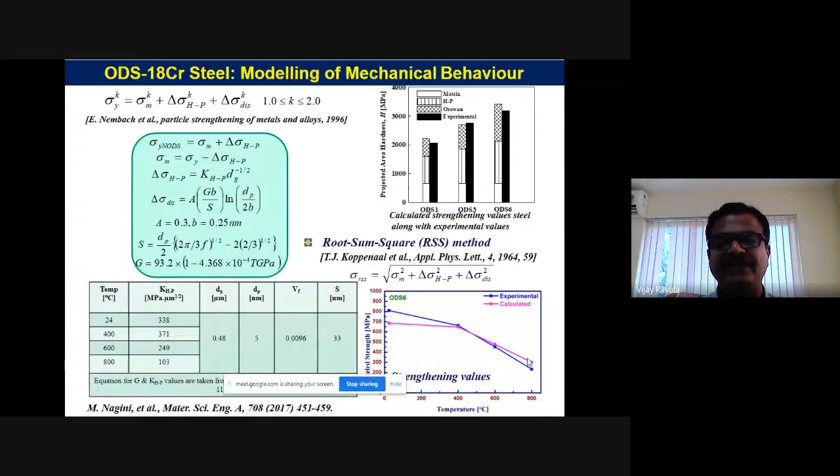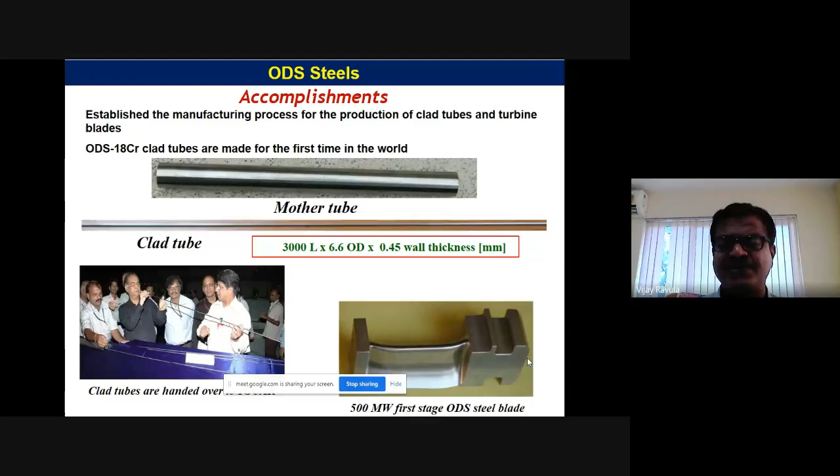And based on that, we are also looking at austenitic steels, because I was talking to you about 9 chrome, where the strength is okay, but the problem is they suffer from corrosion and oxidation because of the lower chromium content. So if you want to use it in gas turbines, where corrosion and oxidation are the biggest problems, we can have austenitic steels, which have good oxidation and corrosion resistance. But austenitic steels cannot be used beyond 500 degrees centigrade. So when we put oxide dispersions, the strength can go up. So that's what we are working on: these austenitic steels, the future generation steels for the turbine blades.

And the other is the aluminides. Many are working on aluminides like iron aluminides, nickel aluminides or titanium aluminides. But these aluminides are very brittle materials, even though they are lighter, because the density is 6.6 grams per cc compared to 8.2 for the superalloys. So around 20-25% reduction in the density, and that will also give you the efficiency of the turbine. The lighter the material, the higher the efficiency. But the problem is that they suffer from poor ductility. The room temperature ductility is only 4%.

But you know that when you go into nanostructured materials, the finer the grains, the higher the ductility of the material, and that's what we have employed. And then how do we retain the finer grain size? By dispersing fine oxides. So we have done that with the iron Fe3Al material, with oxide dispersed in this intermetallic, and we have extruded and made the rods, and you can see that different oxide particles are present, and the strength levels are very high, and even the ductility is very high. We could achieve around 15% ductility at room temperature.

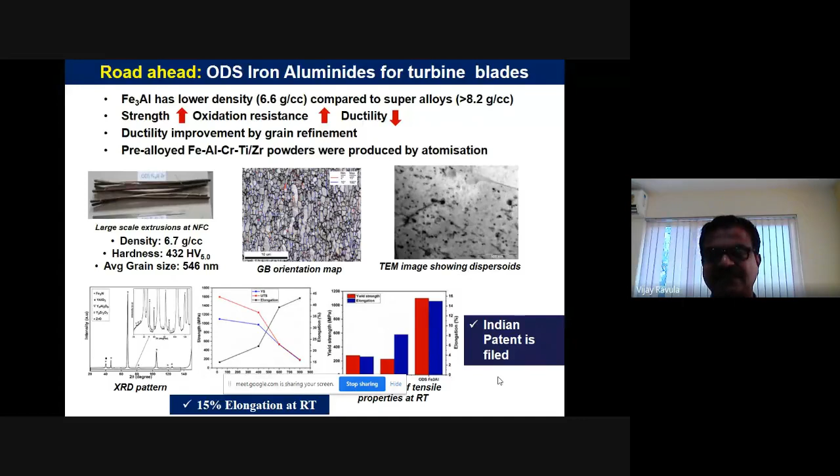Coming to another advanced processing: when you make a nano material, nano powder, and do the consolidation from the powder, conventionally press and sinter is used. But when you expose this nano powder for longer times in the conventional sintering process, after coming out from the furnace they no longer remain as a nano grain structure. They become a conventional polycrystalline material, and there is no advantage of using nano powders to make a component by the conventional process.

The longer the exposure time at higher temperatures, the more grain growth, and they become like any other conventional material. So how do we consolidate? We have to do it at higher temperatures, but in very little time, very quickly. So we need a process where the temperature rise is very fast, something like a heating rate of even 400 Kelvin per minute. That's called spark plasma sintering.

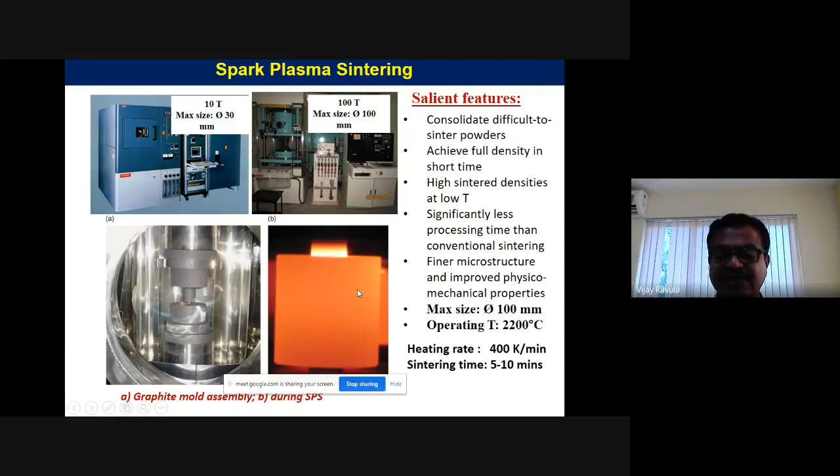You can see that we have both types, 10 tons and 100 tons. The 10 tons is for conventional research, and with the 100 tons we can make some components. These are the graphite dies, where the material is put in the die, and then you have punches. When the high current is passed, you can see the red hot die. That's the picture.

In the SPS process, you pass a very high current in pulses, and because there is a gap between particle to particle, that creates a spark. Also graphite is a good conductor, so there is Joule heating taking place because of the high current; I squared R is the heat generated. That's why the temperature rises very fast. And you simultaneously apply pressure, and they get consolidated.

Sintering of tungsten carbide is a big problem, because it needs very high temperatures to get good density. That's why people use cobalt or even nickel as a binder, with liquid phase sintering. Because of the lower strength binder, the overall strength of the tungsten carbide goes down. But with spark plasma sintering, we don't have to use any binder. We can use tungsten carbide directly and make these components.

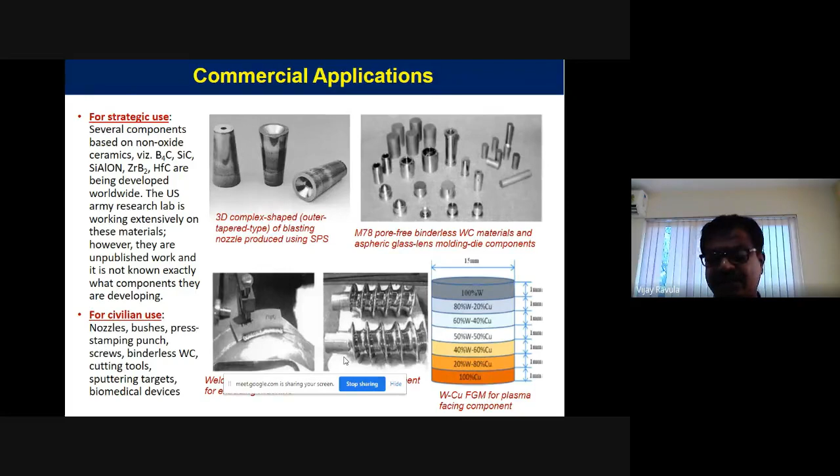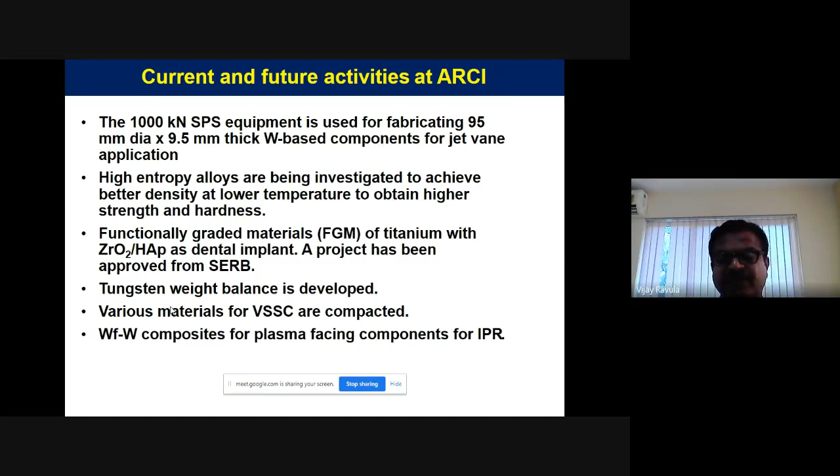And you can always see the tungsten weight balance in the missiles, the missile wings. And some of the other materials also, aluminum, silicon, and other things for VSSC we have been doing. And even tungsten fiber composites for the plasma facing components in the future when fusion reactors are developed, using this spark plasma sintering process. One of the examples I can tell you is the tungsten plates. We can do it by spark plasma sintering.

So these jet vanes are needed at the bottom, at the nozzle of the missile, essentially to guide the missile when it takes off, change its direction, and put it into the proper projection. So you have four vanes, and these are all manipulated to maneuver the combustion gases coming out from the nozzle. So that gives you the thrust, and that can change the direction of your missile.

But the problem is they need to have good erosion resistance at temperatures, and good strength, even though the time is only 5 to 6 seconds. Once it takes off and puts it in the projection in the direction, then it goes off. So it's only 5 to 6 seconds it has to withstand.

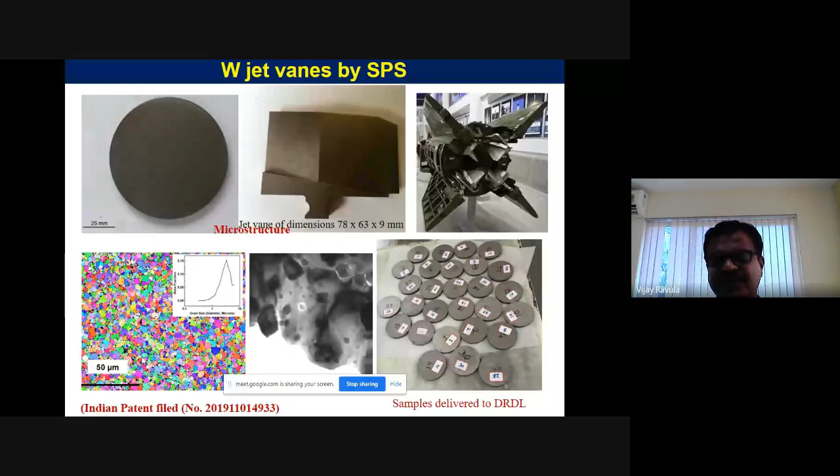And we have been interacting with DRDL, and we made around 32 pieces, where you can see a very fine grained structure, because we dispersed a nano oxide, a different nano phase, and that way we were able to get a very fine grained structure, and the strength values have gone up.

Tantalum carbide is used, and we were able to get around 1600 to 1650, which is much higher. So we have done a lot of experiments and optimized the tantalum carbide content needed to get good density and good hardness. And then we made a lot of pieces and supplied them to DRDL, where the field trials are taking place. And this technology is ready for transfer. Industry is also interested to take up this technology.

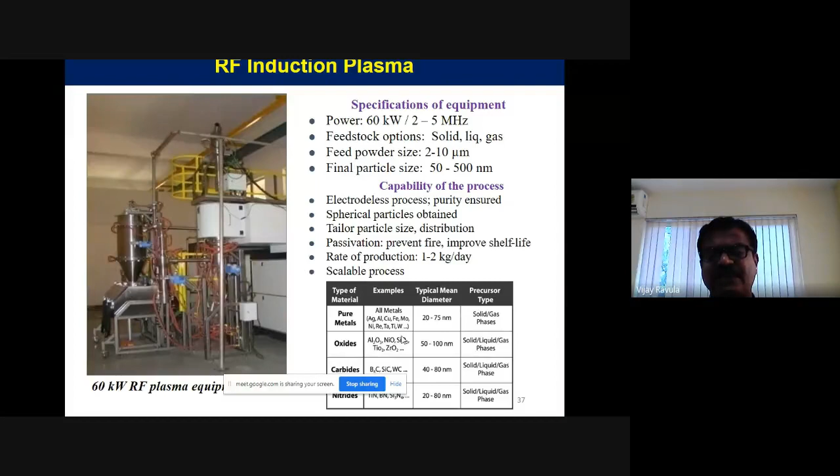Another process is nano powder large scale production. This is called RF induction plasma. This is all a physical process. You start with micron-sized powder particles, and you directly vaporize the material because of the high temperature of the plasma. When you rapidly solidify those vapors, they result in the formation of nano powders. So how do we achieve that?

So this is called a radio frequency induction plasma. The top portion is where you feed the material, in the form of wire or in the form of powder. And this is the plasma zone where you can get up to 5000 degrees centigrade, and when any material comes into that,

immediately, because of the high temperature, the material becomes vapor, and that vapor is quenched by passing argon gas, and you get a metal; if you pass oxygen, you get an oxide, and if you pass nitrogen, you get a nitride. So you can always play with this and get the materials. And these are all pushed by the gas into this hopper, where you can collect it into the glove box.

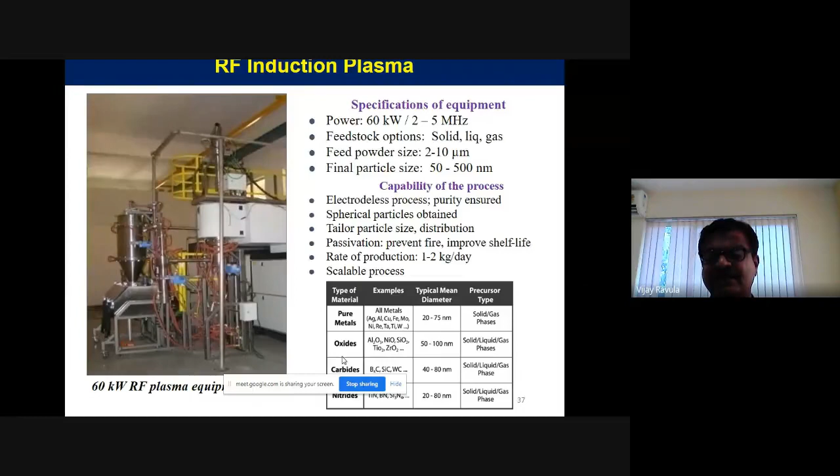So different various metals, pure metals, you can do that: silver, aluminum, copper, iron, various materials you can make. They're around 20 to 75 nanometers. And then oxides, alumina, silica, TiO2, all those things. You can also make carbides like tungsten carbide, silicon carbide, boron carbide. So these are all the things you can do. Even the nitrides, titanium nitride, boron nitride, silicon nitride, all those powders you can make using this process.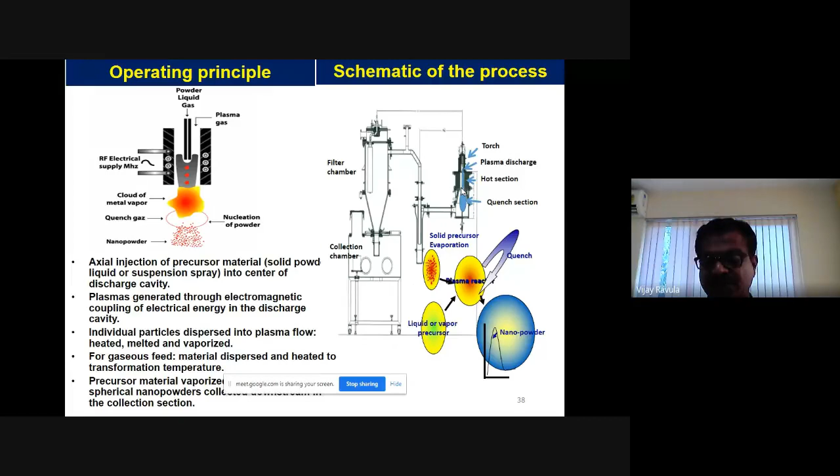And typically what we made is an aluminum powder, nano aluminum powder. Aluminum as such is used as an additive to the solid propellant, and when you reduce the size, the oxidation kinetics are faster, because the diffusion length of the oxygen is smaller. That's the reason you go to the nano size, then the energy release will be higher. If you see the thermal characteristics, the finer the size, the higher the oxidation rate, and the higher the heat change.

So in order to improve the shelf life of the material, what we have done is, on the particles, we just grew a very thin oxide layer. The beauty of aluminum is, once you have an alumina layer, it doesn't allow the oxygen to diffuse further. It acts as a barrier for any oxygen to go into the material. But the problem is, if the thickness is more, they don't burn. Alumina itself acts as a resistance for the oxidation of the metal. So you need a very small thickness, so that the material will not get oxidized when it is exposed to the air,

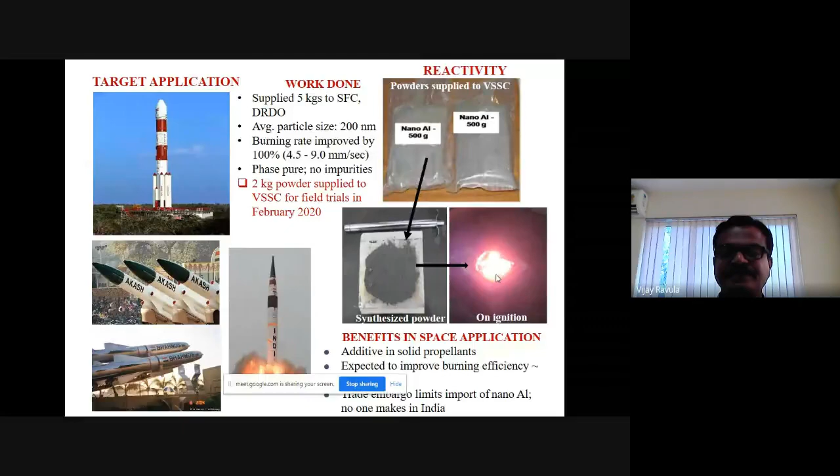Coming to another advanced processing, additive manufacturing. You might have known what additive manufacturing is. You build the components from a 3D model; from that you build the component or part layer by layer. That's additive manufacturing. And you know 3D printing is already in the market, making different plastic things, like syringes, already being manufactured in industry.

But metal additive manufacturing is a new thing. People are still only working on it. It's not at the commercial stage, but we are working on it. The advantage is you can get any near net shaped component or intricate shapes which are not possible by conventional machining. So you can avoid machining, avoid wastage of materials, and have features which are not possible by any other conventional manufacturing technologies. So additive manufacturing has its own advantages, and that's where we have been working.

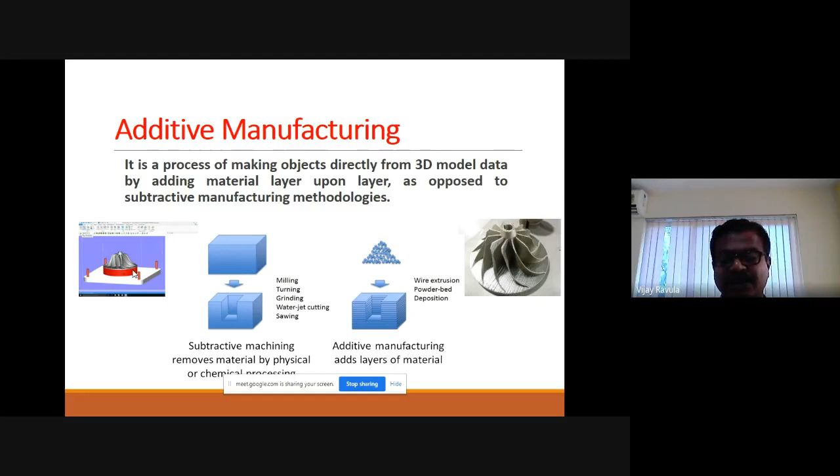So how do we do that? You can do powder bed fusion. You have a powder bed, and the powder is melted layer by layer; as per the 3D model, it's all sectioned, and the powder is melted by the laser. So you can have selective laser melting or direct metal laser sintering. In selective laser melting you have a powder bed where the powder is filled as a layer. Then the laser moves as per the contours given in the drawing, melts it, and it gets welded to the layer below.

In direct metal laser sintering you have a nozzle with a powder hopper that moves along the contours as per the drawing, and the laser moves behind it and melts the particles so they get welded to the layer. You can also use electron beam welding with wire and build things. You can have direct energy deposition with powder feed or wire feed systems, or even sheet lamination, or ultrasonic additive manufacturing. These are all the options.

What we have in ARCI is selective laser melting, SLM, the powder bed fusion method, and also a DED powder system. We also have a binder jet system, where the powder particles are integrated with a binder. The liquid binder is poured as per the contours, so that it solidifies and binds the powder particles together.

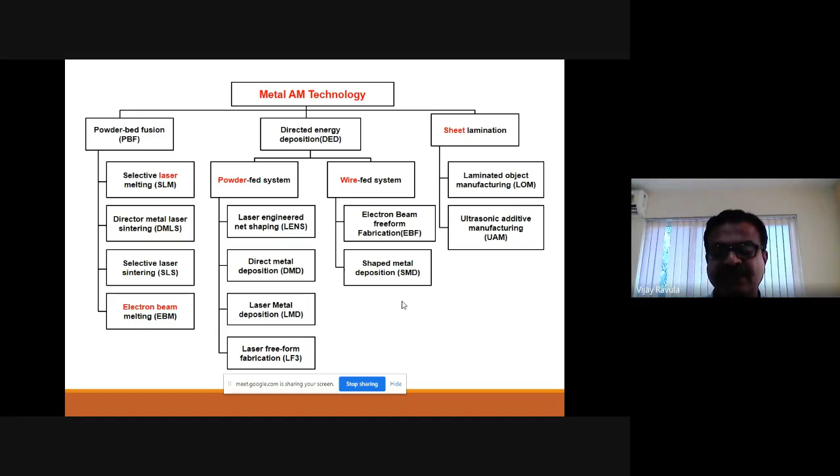You get a structure, and then that has to be post-processed through heat debinding and then heat treatment to get a good density. So we have 3 systems in our ARCI.

Conventionally, what we are doing is you design a model of the component you need to have. Then from the model you get a machine, and you also need a powder. So we also have a powder manufacturing facility. Once we have the powder, from the model you put it into the machine and manufacture the component.

You can also do the post-processing of the material, because post-processing is very important since this is a non-equilibrium process with very rapid cooling and quenching taking place. The material being melted is around 100 microns or 50 or 40 microns, and then it gets cooled very fast. The cooling rates are very high, so it's like a quenching process.

It also has repeated heating-cooling cycles going on, because you are building the whole component layer by layer. You definitely need to do the post-processing, so you need furnaces, and if you want to improve the density, you need hot isostatic pressing. Then you will also have characterization. So all these facilities are available at ARCI.

We have been working on and developing many components, many of those things. So what is a powder bed AM?

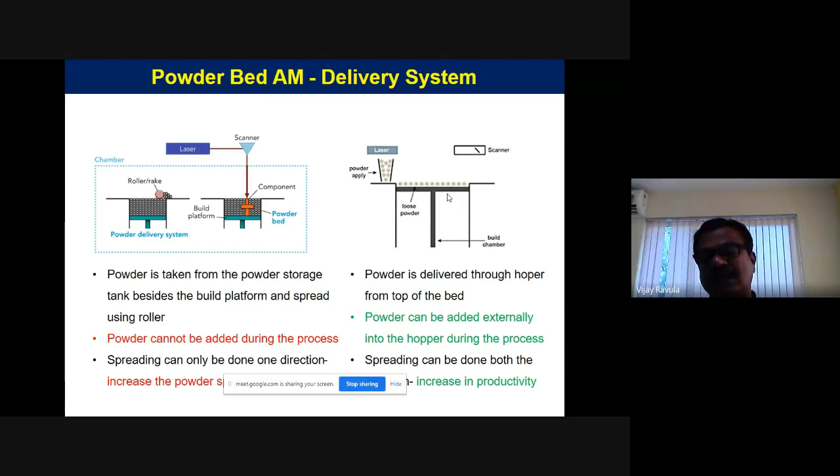Powder is delivered through a hopper from the top of the bed. The laser moves and builds it, and then the build chamber moves down. Then again similar powder is spread in the bed, and the laser moves as per the contours and builds it further.

So what is all happening? Our roadmap towards that is we need to have raw material - that means the availability of powders for additive manufacturing.

Since it's a non-equilibrium process, the microstructural development is totally different. The properties we get from conventional manufacturing, like casting and forging, will be totally different than the properties achieved by additive manufacturing. This means we have to use different alloying elements, different systems for the same kind of material.

We always have material interaction and formation of melt pool, scanning area, efficient scan speed - because it's a slow process. If producing one component takes around 100 or 200 hours, economics ultimately decides the success of any technology. If it takes too long, the cost will obviously be higher, so it's not economically viable. We need to improve all these things.

You have to select different AM systems for different components. You can see the build chamber size differs - different sizes mean different components can be made if you have a larger chamber.

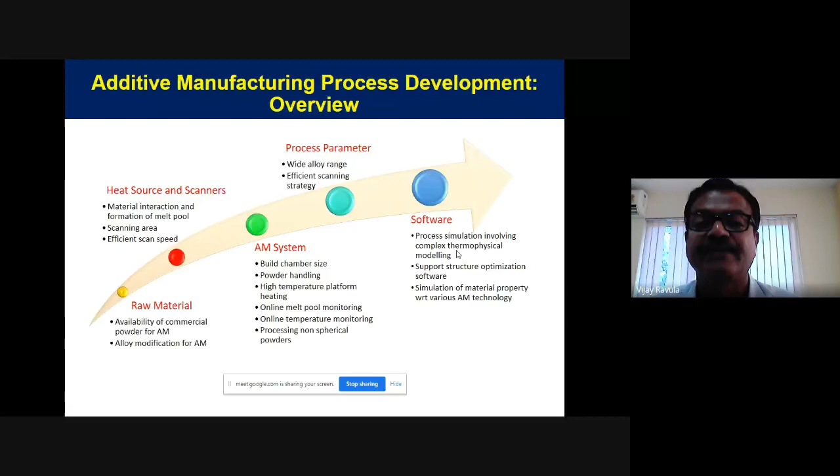Going back, we are all working on developing these aspects in our organization: design for additive manufacturing, application development, development of specialized powders for AM, repair and refurbishment, numerical simulations, and indigenization of the technology. These are all the things we have been working on.

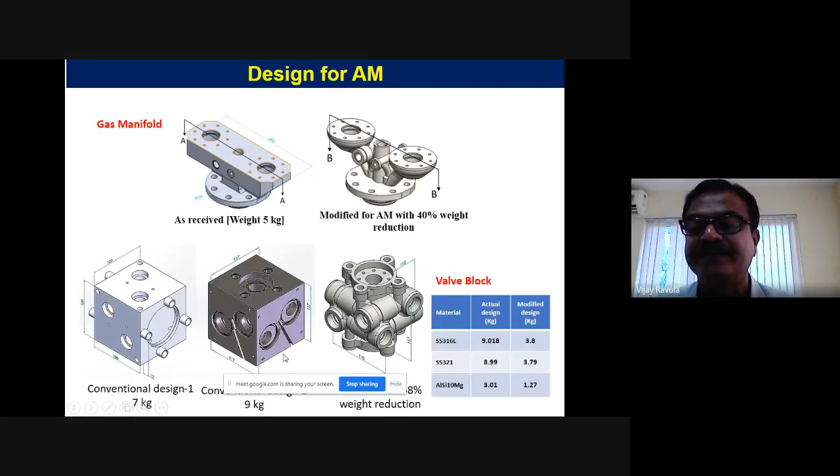So we can always see that we have design freedom. We can also have part integration, putting one part into the other. We can always build intricate cooling channels, conventionally not possible. Even lightweighting, we can do that, putting in honeycomb kind of structures, and you can always do dissimilar welding as well as alloy powders.

The basic problem is the non-availability of powders, because all the powders are being supplied by the manufacturers of the equipment only. We have to depend on them with their own chemistry and particle size. But there is no powder availability, so we have embarked on powder development indigenously.

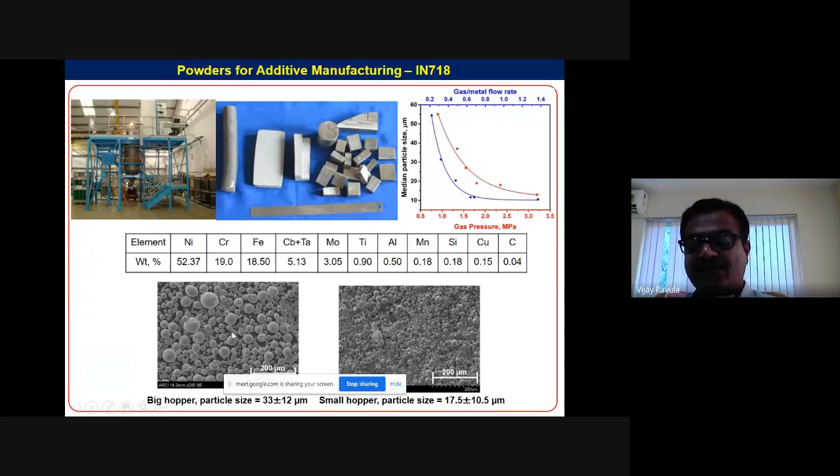We are working with MIDHANI in these terms, because ARCI is a research organization, we cannot - it's not a production unit - and ultimately somebody has to take up this production technology for the supply of these powders to various AM users. So we are working with MIDHANI to establish a plant for the production of powders for additive manufacturing.

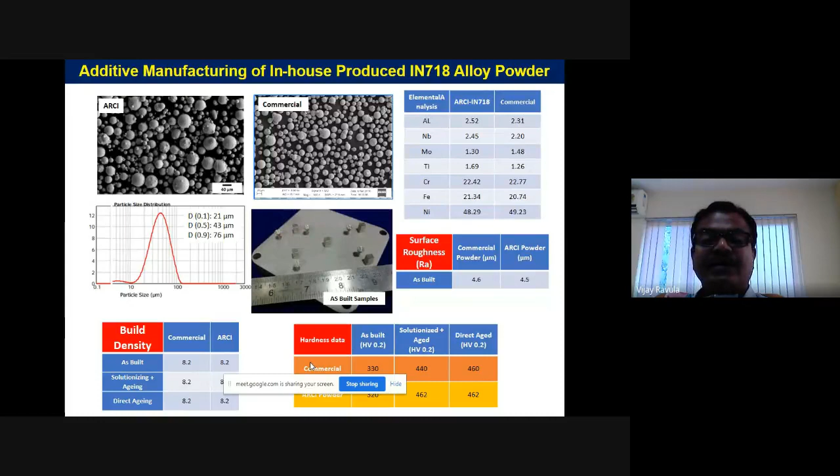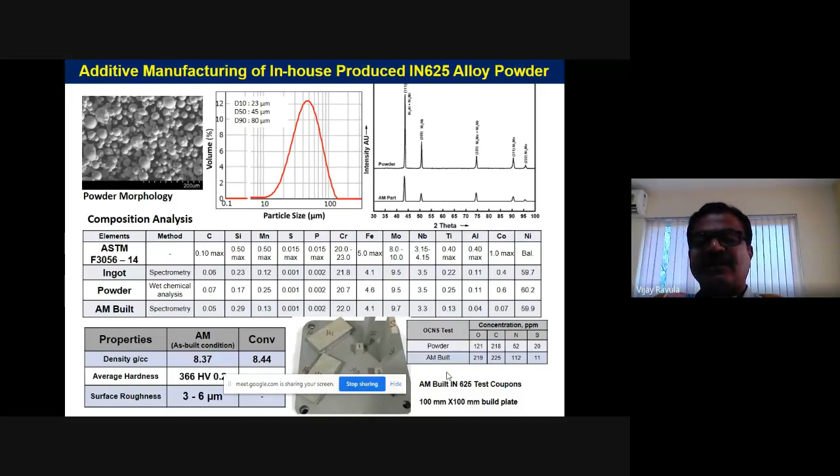Similarly, IN 625, another superalloy powder, is also produced in our ARCI in-house facility. We could always see that the composition is all matching, and also the properties are matching with the conventional powders. Even the oxygen content we could achieve is much lower than the commercial powder. Lower oxygen content means higher purity and higher performance of the materials, especially in these superalloys.

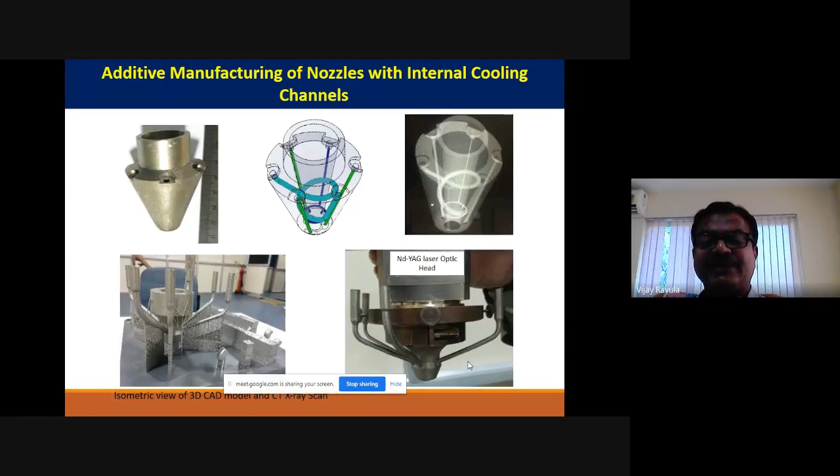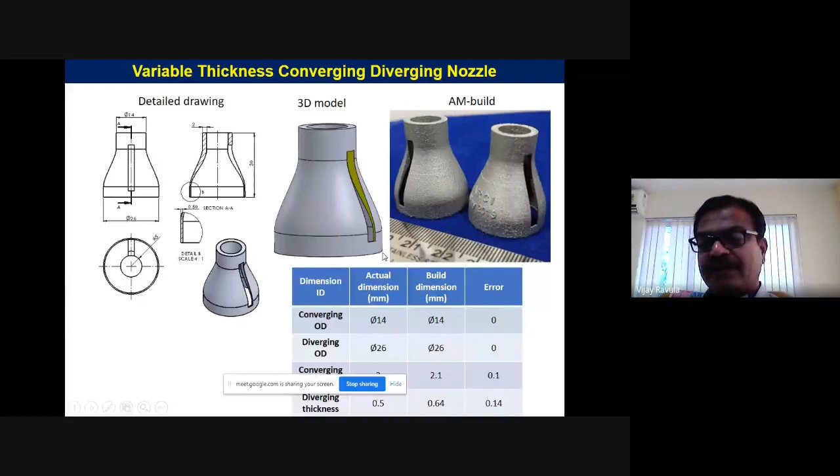So these are all some of the things that advanced processing at ARCI have been doing. Thank you.